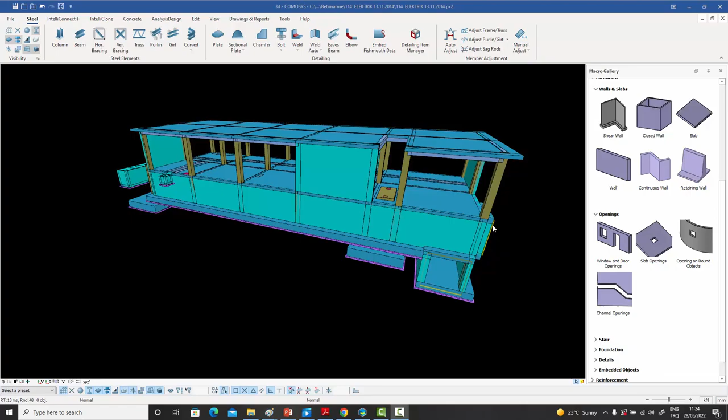Last week, we got an amazing response from everyone who attended the steel detailing webinar. I was hesitant to create a webinar lasting almost 2 hours, but to my pleasant surprise, some of you actually watched even that long video more than once to understand it better. Now, that shows that our audience is receptive and they like what they're seeing in Comosys. What it also shows is they want change.

So, emboldened by that wonderful experience, I decided not to hold back and try to show you as much as I can today as well. So, today I'll be talking about concrete modeling. Today I'll be talking about rebar modeling. And today I will also be talking about concrete and rebar drawings extracted from the 3D model.

Now, I know from our research that the concrete and rebar industry hasn't really embraced 3D modeling the way the steel industry has. And there are many reasons for this. Some are technical challenges, while others are merely psychological barriers which get in the way of decision makers. I will try to present Comosys to you in such a way which relieves both your technical as well as psychological fears. I will try my best to make modeling look like a walk in the park.

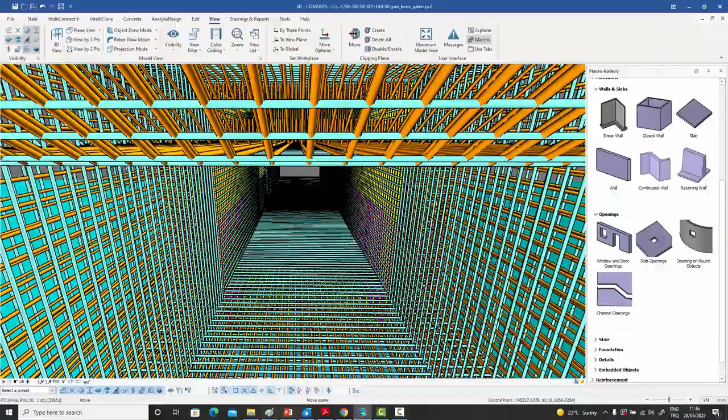I'm hoping to win over many new converts today. I'm hoping you will leave this webinar having decided to give 3D concrete and 3D rebar a chance. I'm hoping that concrete lovers will not stay behind and give their steel brethren a run for their money. But most importantly, I want you and your business to benefit from 3D modeling.

If you can reduce your man hours by just 20%, you can perhaps double your profits. But I'm here to tell you that with the right skill sets, you can reduce your man hours by half, if not more, if you use 3D modeling for both concrete as well as rebars. And that's not all. The quality of your work will also skyrocket. That's what 3D modeling is supposed to do when done properly. So let's start today's presentation.

Now let's create some simple beams and columns. And this is not really the area in which one program would typically excel over another. We can just copy a column around, for example. We can enter some beams, use the same copy array command to copy it across the columns. Obviously got one more copy. If you use the same numbers, I can delete the last part.

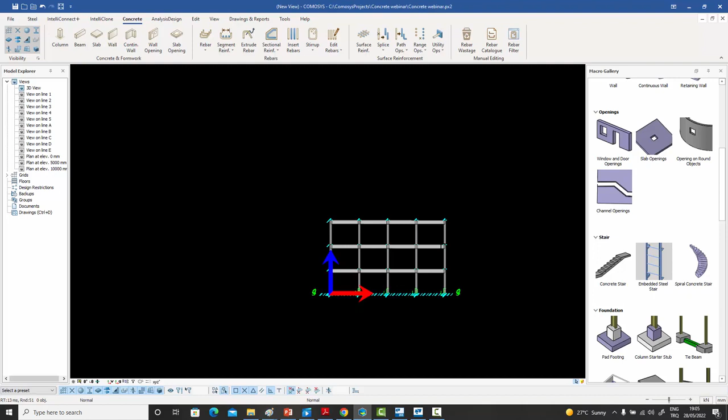This is extra, and I can then zoom in and enter the beam on the other side. Use the same copy array method to copy the beams as well. Then I can delete this extra one, and then I can look at it from the side. For example, I can maybe delete a part of the building like that.

Maybe if I want, I can select the joints only, and after doing that, I can just call the move command and move them up a bit. Secondly, I can maybe delete this part of the building, make some movement, make it look a bit different from a standard copy. So this part up till now, what you've seen is pretty much this kind of data entry for normal buildings, for high-rise buildings, for any kind of building.

That's very simple. It's when you get to the more complicated stuff that modeling starts consuming time. If it's only beams and columns and you're copying them around even 100 stories, that's not really much of an achievement. But when you really get to industrial type buildings with lots of holes and channels and whatnot, and I'll talk about those in a second, that's when you get problems, and that's where one program will be different from the other. Now let's create a slab.

So all we do is just select any number of points, at least 3. You can't enter less than 3. But if I'm going to select 4 points, a slab will be created immediately at the floor level on which I'm working. Now, one requirement, especially in industrial type buildings, is to have slab openings. So all we do is just go to the slab opening command, select our slab and select a point, and immediately an opening is created at that point.

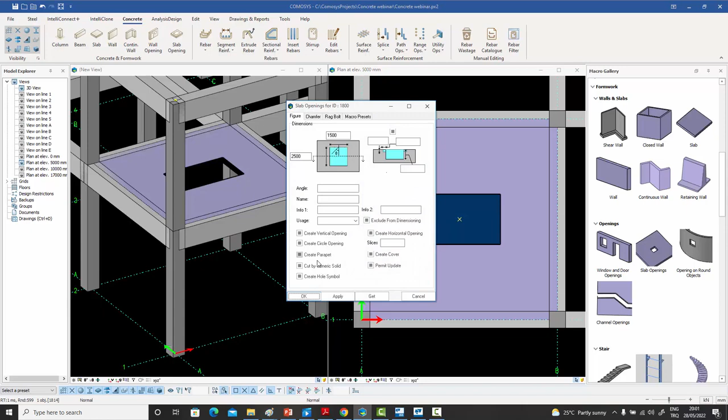Another thing I can do is I can double click it again and I can give it an angle. So if I enter 30 degrees over here, you will see that the cut which was created is then turned at an angle of 30 degrees. Another thing which we can do is convert this into a circular opening, for instance. So if I press this one, it converts it into a circular opening. I can bring it back by removing this flag, and that's as simple as that.

Another very nice feature which I have is I can double click on this opening and I can say create a parapet around it. And when I do that, this little parapet is created around that opening as a separate intelligent object, by the way. So if I double click on that parapet now, I can give it the dimensions which I want. So I can make this 500, make this 300. That'll change the dimensions of the parapet, as you can see on the screen.

Or I can go inside again, and I can even give a thickness, a width over here. And what it does is it creates a little place over here for some covers to come, which are very typical in industrial type structures. You can have a cover over here, and that cover will need to sit on that concrete. So imagine normally if you were doing this with manual detailing with lots of cuts, you would have spent probably about 10-15 minutes just getting this parapet in order.

But that's not all. If I continue double clicking on the parapet, I can even ask it to create a cover for me. And there you go. My concrete covers for my industrial structure are there. And I can modify these, and these are customizable. All sorts of customizations are available.

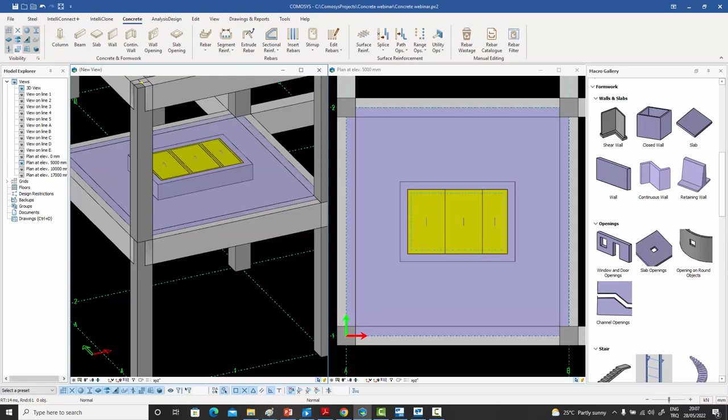But the point I'm trying to make over here is that the simple command of creating a hole in the slab, which we started off with, has led into so many details that that little hole converted into a circular hole or any other sized hole, or you could make a parapet around it. You could give it certain dimensions. You can create a cover around it. So within a few clicks, and all these are actually hindrances in other commercially available modeling software, because just finalizing this little hole will take half an hour, and typically detailers will shy from that. But in Comosys, you're free to do this kind of detailing very, very quickly.

Now, instead of creating the parapet, which we just did, we can just directly create this little depression directly on that hole as well. So if I were to enter that, we can see that instead of the parapet, directly I've created this depression so that a cover can come directly on top of this hole.

And this simple hole command doesn't even end there. I can even give chamfers. So if I give 4 chamfers to the corner points, I can create this sort of a chamfer around it if I wanted to. Or I could give it a different type of a chamfer if I wanted. I could remove this one, and I could give point number 1 a circular chamfer, and a totally different kind of an opening would be created.

And it's not even that only. I could just double click on this, create a small hole, for example, go to my chamfer tab, and I can have a grid of holes if I wanted to. I can have them in both directions. So by the simple cut command, I've created several holes in that slab in one go by just modifying the parameters of a single command, which we used for creating slab openings.

So you can see that this kind of versatility is extremely useful when you're dealing with complicated situations, industrial plants, and your normal modeling techniques, while available, do take up a lot of time. But with Comosys, you can do the same stuff very, very quickly.

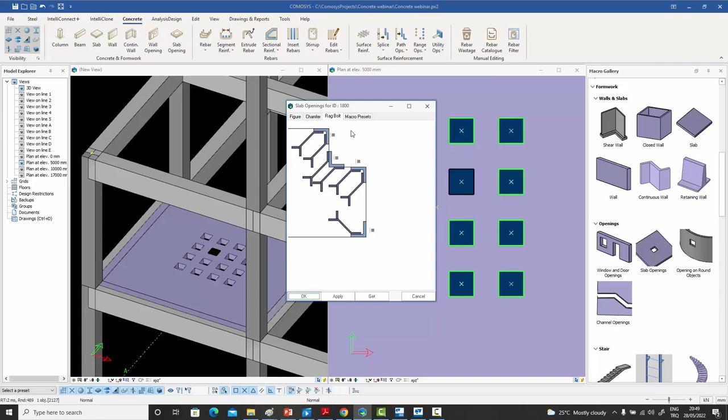So the idea behind 3D modeling is that you should model everything in the 3D model, not just half the building or part of the building. Because the moment you start modeling a part of the building, it comes back to haunt you, and eventually your model will be broken from your drawings, and that'll be the end of it. But with Comosys, you don't need to do that. You can actually model right down to the final rag bolt and get on.

Now let's enter a few walls. So I go to my wall button and I select 2 points basically. And the moment I do that, you can see on the 3D view that the wall has been created. Let's continue on the other side and create the wall over there as well. Now, as you can see over there, the height of the story is different. The height of the building is not the same as this side. So I just double click it and I change the top level to 5,000, and my wall has been finalized.

Now, if I open up the dialog box again, you can see that we have complete control over the top level of the wall, over the bottom level of the wall. So if I specify this to be, say, minus 2000, then the wall will continue 2 meters down as well. So I have complete control over that. I have complete control over the thickness of the wall. I can give the height directly or by giving the elevation. I can give it some start and end offsets if I wanted to.

And there are some, once again, details for the top of the wall. Once again, all these are features which save time. So if there's something sitting on top of the wall, you can create this kind of a feature at the top by directly entering some numbers instead of going through the normal procedure of using the cut command, etc. And it's very easy to use, as you can see on the screen. Just enter 2 points and your wall is ready.

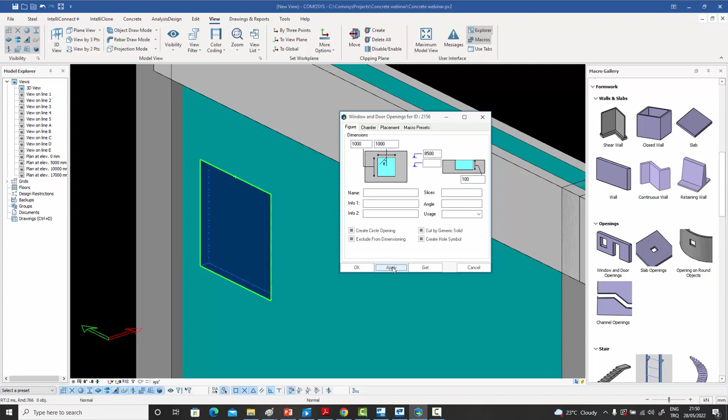For example, if I were to enter 100 over here, I can even create a partial opening. What that means is, if I turned off the cuts, for example, it can just create a depression in the wall, not a hole right through the wall, but just a depression. So there's a lot these commands do. They look like simple commands to create openings in slabs and walls, but they can be used to create openings of all sorts and with different details.

In concrete modeling, we usually have continuous walls. So these are not walls which you can create with 2 points, but you need multiple points to define them. And we can do that very easily with the folded plate command in Comosys as well. So let me just go through a few points. Let's go like that and right click, and immediately a wall is created by the default settings.

Now, this is a bit more than just a normal classical folded plate, which you might be used to. What you can do is you can double click on the wall, and you can go to the chamfer section. And this was point number 1, 2, 3. So you can go to point number 2 and give it, say, a chamfer of 2000. And when you do that, you get that chamfer. I can continue. I can give the point number 3 a chamfer of 2000 as well.

I can continue, and what I can do is I can ask for the outer chamfer not to be created. So when I do that, you can see on the screen that the inner chamfer has been created, but the outer chamfer has been omitted. So you can have these architectural requirements, and by the same folded plate command, which normally doesn't do these kinds of things, you can create walls of this kind of variety.

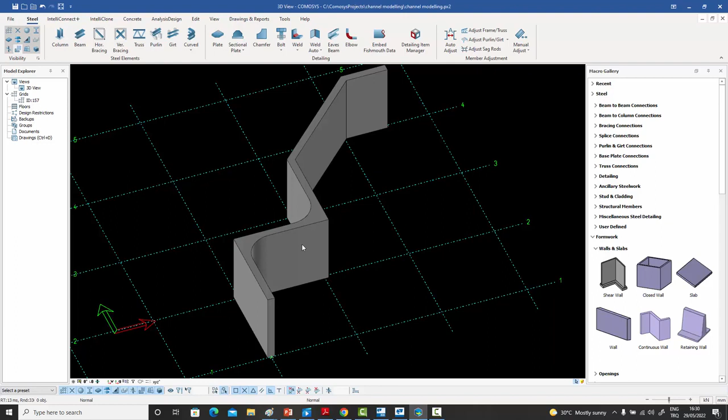Another thing which is very useful is that normally in a folded plate command, the thickness is constant across the wall. But I can ask it to do a thickness of 500 millimeters for the first leg, 1000 millimeters for the second leg, and back to 500 for the remaining legs. And when I do that, you can see that it starts off with a thickness of 500, turns into a thickness of 1000 millimeters, back to 500 for the rest of the remaining legs.

And I can just go back in and even say do that only for the third leg, and from then on just make it a really thick wall of 1.5 meters. And immediately on the screen you see that you've got this variable thickness wall created by the same folded plate command, which can also be used for steel structures. But over here with concrete structures, these kinds of walls are not very uncommon. You can find them, and whenever you do, it's very easy for you to model them in Comosys.

Now, just like we saw how easy it is to create holes and then modify those holes or multiply them in the form of a grid, similarly, in industrial buildings, pits are also very common, which is when in a slab you have an opening which then converts into a little pit, and there's a bottom slab which is lower than that slab, and there are 4 walls around it, and that takes up a lot of modeling time for most people. So in Comosys, we've provided a direct command for that. All you need to do is select the slab and select the point, and immediately a pit is created, as you can see on the screen.

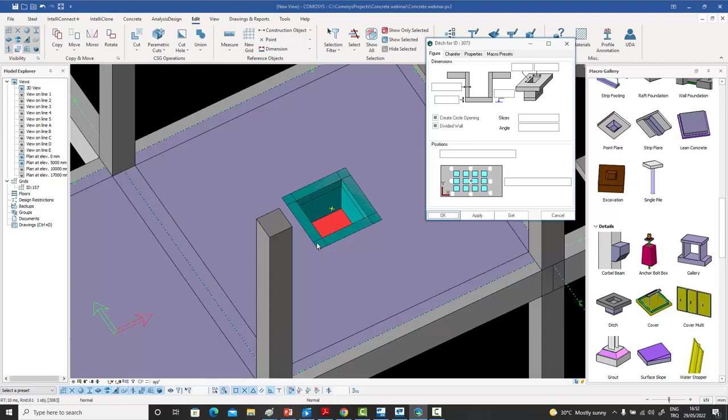Normally, typically a detailer would first create a hole, then create the 4 walls, then create the bottom slab. And if there's a revision regarding the heights or anything, then everything would need to be changed. But in Comosys, it's very easy to just do that. And once again, you have your chamfer parameters and your other geometrical parameters to play with. You can even create a circular opening if you wanted to, and you can create the walls as divided walls or as one single wall. That would depend on how you want to number them.

Now let's quickly select the bottom floor columns, press enter, select our profiles through on the fly filtering, double click, and once we get the columns, we can move the bottom to 2 meters below the 0 level, and the top can remain the same for the ground floors, and all the columns by this single motion will be moved 2 meters down. We can once again move the walls as well. We can give these a level of minus 2000 as well. Same for the other side.

And once we are done with that, we can go to our simple pad footing command and select the column, and the pad footing is created. We can select the pad footing, copy array, and in the same way we did with the columns, you can just copy the pad footings. And in a few clicks, we've gotten the foundation system almost ready as well.

Now, with a few clicks, we can create our tie beams between these pad footings, for example, like that, just by selecting the two pad footings, and then copy that with the array command as well. And if you just press copy, they will be copied in that direction. And then we can continue for the other direction as well.

We can create a tie beam between these two, select it, and do the array copy. But this time we do 4 copies in the X direction and 3 copies in the Y direction. And we just say copy. And with a few clicks, we've gotten the tie beam system ready as well.

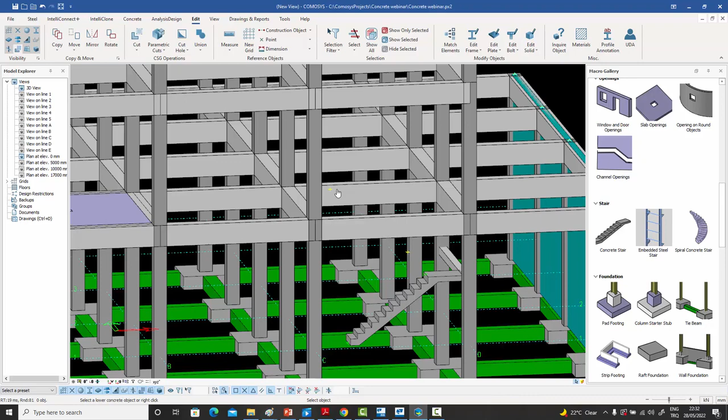Now, as you can probably tell by now, modeling in Comosys is quite easy, and I'm going to continue doing that. For example, let's model a few stairs. I'm going to select a few points, right click, and once again, select a few points and right click. And as you can see, it's not that difficult. If I just double click and do some modifications, you can see I'm doing it as you're seeing it on the screen.

With a few clicks, you can create the staircases as well, and then you can copy them to the other floor. For example, let's now copy them 5 meters above, and we get the second floor as well. So with a few clicks, like you saw on the screen, you are able to create your staircases and then connect them to the beams and the columns. And as you're doing it, the model is being created.

And what I mean by that is that if you notice right now, all these are separate pieces. They're not monolithic. But what Comosys does automatically is it converts them into a monolithic piece of reinforced concrete. So it becomes one piece when it comes to the drawings.

And if you notice right now, I haven't given any detail to the clashes. Everything is clashing with everything. This beam is going inside the column. This staircase landing is going inside the beam. The slab is going inside the beams. The walls are going through the beams and whatever. So there's a lot of clashes going on right now. But all those clashes will be sorted out once we go to the drawings.

So if I was to go to the drawing side right now, and open a drawing, basically I had created some views, but the views were empty because I didn't have any model. But now the views have been filled up because I was doing the modeling in front of you. So as you can see, everything has become monolithic and has become one piece on the drawing side. And we'll talk a lot about this later on. But I just wanted to show you that as we are doing the modeling, everything is being connected, and it's becoming one monolithic piece in concrete.

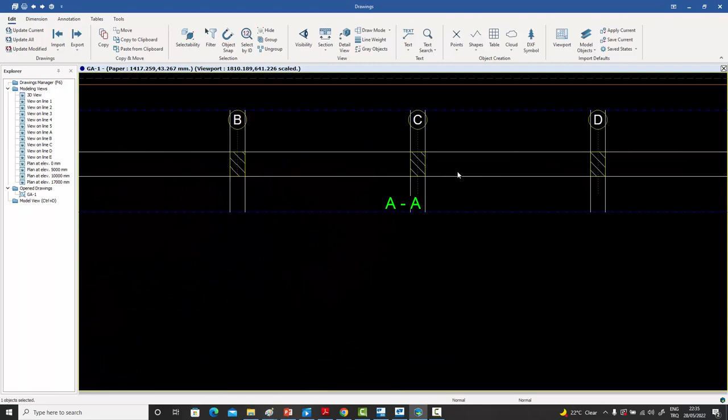So this is a section taken there. You can see the stairs. I have the section over here. If I move the section from here to some other location, immediately that section over there will be modified according to the new location. And basically the point being that the drawings are completely connected with the model.

They have not been dimensioned yet. They haven't been annotated yet. We'll talk about that. But at this point, what I want you to notice is that it has become one monolithic piece, what was many small pieces or many individual pieces on the model side.

Now, I've been emphasizing throughout the webinar that if you want to do 3D modeling, you have to do it completely. You can't do it partially. And everything needs to be modeled. And once again, in concrete also, the steel industry is fairly used to this, but the concrete industry, unfortunately, is not. And what they do is they typically try to model as much as they can, and then they switch programs and they move on to AutoCAD and finish the job in AutoCAD.

But this is not the right way to do it, and Comosys will encourage you not to do that. So, for example, one thing which you might notice is incomplete right now is the lean concrete under the foundations, which needs to be poured. And you might be thinking, oh, that's going to take a lot of time. There's so many foundations and tie beams, all of which will need lean concrete under them. But I'll just show you how quickly it can be done.

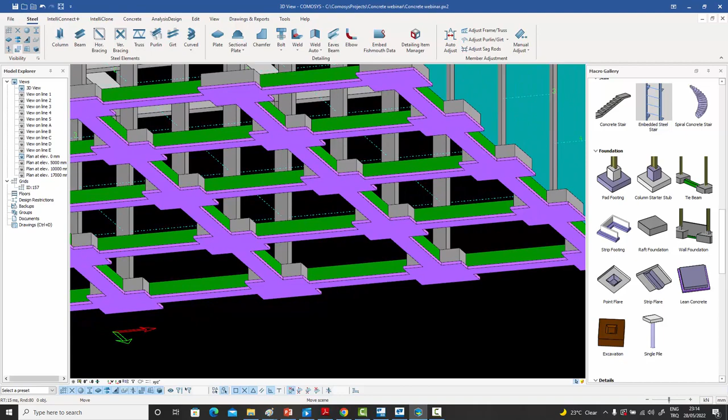You just select this bottom area, press enter, press the plates, and you can group them in different ways. I have selected the tie beams and the single footings like that. And after having done that, let's just go to this lean concrete command over here and just press it. And the moment you do that, just look what happened. These pink lean concretes have been modeled under the foundations with a single click. This would have taken you hours and hours to do maybe. But with a single click,

all the lean concrete has been modeled, and now that it's been modeled, it's going to show up in the drawings as well. And this is not going to be unioned with the main cast in place concrete. This is going to be a separate union. It's going to turn up as a separate object, and there'll be a line over here. Normally, if it was all going to be union, they would merge into one piece. But in this case, the program intelligently knows that the lean concrete is a separate object, and we'll see the results of that later anyways. But what I wanted to show you is how quickly and how efficiently Comosys will help you literally in a few seconds model your lean concrete.

Now let's talk about drains and channels, which are very common in concrete industrial buildings, and they're used for different purposes. There would be a drain going along a slab, for example, collecting some fluids or draining them out. And they're usually very difficult to model with cuts because of their shapes. So in Comosys, what we have are specialized cut commands. So let me just select the slab and right click, and then let me just show it a path. It's going to select a few points. Point number 1, 2, 3. Let's go like that. Let's go to the mid. Let's come back over here, and let's go out from there, and then right click.

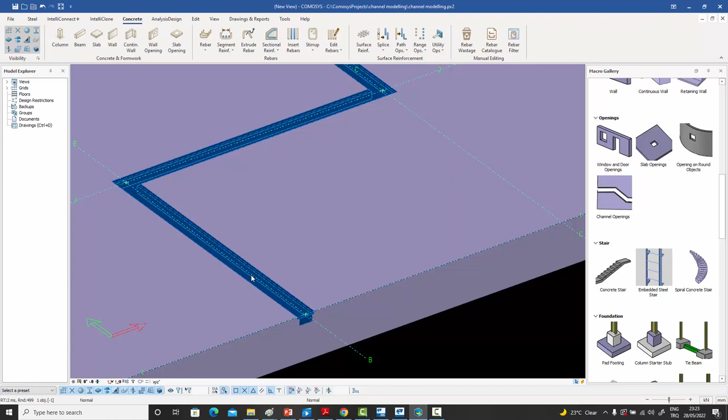Now, the moment I do that, let me just close the cut so that you can see it better. And you can see that this channel has been created all along that path which I showed with a few clicks just by selecting the points. Normally, if you were to do this by using the normal cut commands present in typical commercially available softwares, this would be pretty time consuming. And this is not all. If I were to just open up the cut and double click on that, you would see that there's a lot more going on over here.

For instance, I've got control over the widths of these channels. So I can enter 500, for example, and if I press apply, the width of the channel changes. But I can also enter 500, then 1000, and then go back to 500. In that case, the second leg of the channel has a width of 1 meter, and then the rest go back to 500. So this gives me even more control over what I can do with the command.

Another thing which I can do is I can turn on these little boxes over here. And when I do that, the ends have been modified, if you can see. This kind of a detail is pretty common wherever it's pouring into; the final detail could be something like that. So imagine doing that by using the classical cut commands. That would take you a long time. But the presence of such dedicated cut commands will really make your job a lot easier.

Another thing which I can do is I can give chamfers. So this was point number 1, this was point number 2. So I can go to my point number 2 and give it a chamfer of, say, 1000 by 1000. And if I do that, you see that this chamfer is created over and above my original definition.

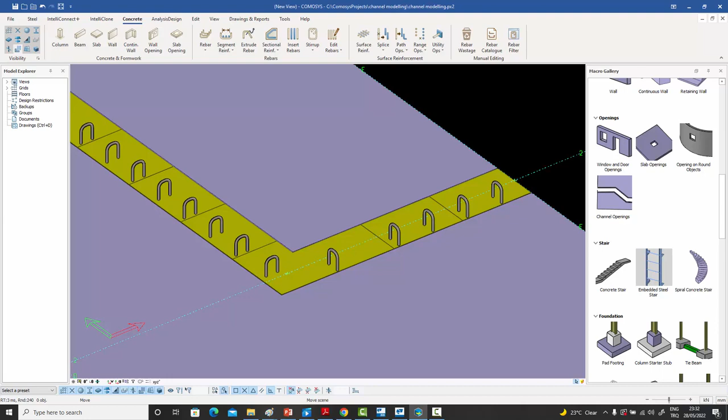But the point being that with a single command, just by selecting point 1, point 2, point 3, 4, 5, 6, 7, you have created a very complex detail which then allows you to go directly to the drawing side and create the drawings automatically from this model, instead of taking it to AutoCAD and finishing it off in AutoCAD for details such as these.

Galleries are very common in industrial plants, and these could be underground galleries or overground galleries, depending on the situation. And they're typically used to carry pipes or electrical cables from one point to the other across the plant. And this is what they typically would look like. So let me set the origin of interest somewhere over here, and so it's basically a gallery. And what you have is these cable raceways or pipe supports coming from the sides of the walls on which the pipes or the cables actually eventually run.

Now, creating this, of course, is slightly time consuming depending on the geometry. But in Comosys, let me just delete this one which you see on the screen, and I'll show you this dedicated command for galleries. All you need to do is just select point 1, point 2, point 3, point 4, and right click, and your gallery is created. If you double click on the gallery, you have complete control.

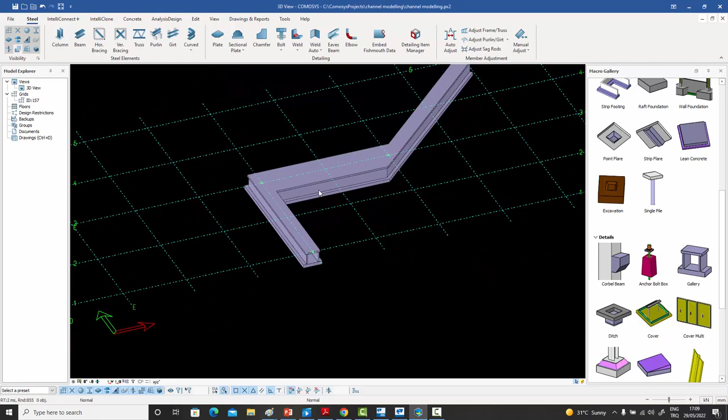You can obviously change the points around which it's anchored from those parameters. Using those parameters, you have complete geometric control, as you see, over the size of the gallery, etc. You even have options for widening the gallery at the start and at the end. It's very easy to see that doing this manually with 5 or 6 wall commands will be time consuming.

So for example, if I were to go to the properties section and go to the chamfer part over here, I can give my point number 2 a chamfer of 5,000, 5,000, and you can give this inside part a chamfer. Sometimes you have this issue where the pipes or the cables cannot turn that easily through sharp corners. So you need to give them some sort of a chamfer for them to turn. So it's very easy to just create this.

And the reason why I'm showing all this to you is to remove the fear which most people have of industrial plant concrete modeling. They think it's going to take a lot of time, but from what you're seeing on the screen, it's pretty obvious that with Comosys, you can very quickly go through the modeling of the concrete.

Another example which emphasizes the fact that we should model everything and not leave anything out of the 3D model is the excavation. Normally, when people do 3D modeling, what they tend to do is model the main structure.

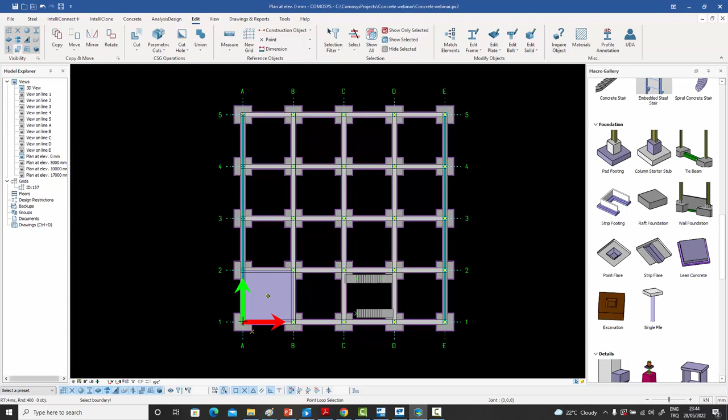So let's go to the excavation macro. It asks for the bottom level. So let me just say DZ minus 2,600. If you remember, the bottom level of the foundation was 2,500, but then we added the lean concrete, so that's the bottom level now. And then it basically asks me to go around the perimeter of the structure. So I'll just go around these main points and finish it off. And when I do that, it creates this excavation model.

Let me just double click on that and let's increase the size a bit, or maybe it needs to be a bit more than that. Yeah, this is better. And let me just rotate this and show you what it's done. It's created this hypothetical model of the excavation, and you can further model this in much more detail. I'm just going to show you what the results would be. Let me go to the drawings, for example.

As you can see in the drawings, that excavation now exists as part of the model. And now we can give levels over here. This is plus minus 0 level. This is minus 2600 and so on. But the point is that because we've modeled it now, we don't need to go to any other software and finish it off over there. We can continue working in Comosys, and that is the basic rule of 3D modeling, that we should not leave anything out. And once again, what I just showed you was probably the simplest model that could have been made.

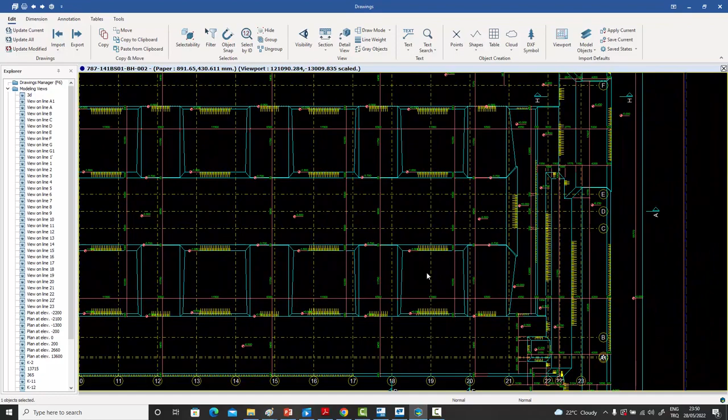Here is a much more complicated model of excavation, and you can see that this is multi-level excavation from here to here, then further down, and the slopes have been given. It has all been modeled, and a separate drawing has been created just to show the way the excavation is going to be done at the site. And this feature becomes extremely useful because not only can you show the details of the concrete, but you can also show the details of the excavation for the people at the site, and you can provide 3D views of the excavation as well, which also makes their job a lot easier.

Now, of course, in real life, concrete can be a lot more complex than merely beams and columns and walls and slabs, and you can get very complicated shapes, and that's the beauty of concrete as well. But your modeling programs need to be able to handle those shapes as well. So we have in Comosys all these generic primitives, like boxes, cylinders, cones, pyramids, spheres or toruses. So let me talk about the tapered solid, which is interesting. So let me just go over.

All you need to do is basically just select a closed loop, and it'll create a tapered solid for you. And then if you double click on that, you can give it a height, and let's give it a height of 5 meters. And once you enter it, the box is created. But then you can go on and give it a taper of say 11 degrees. And from all sides, it's going to be tapered inwards to 11 degrees. You can give it minus 11 as well, or whatever number. But what you can do more than that is actually say, okay, the first line would be 11 degrees, but after that, I want 20 degrees. So you can get an even more complicated tapered solid if you want. This really makes it quite convenient.

But more than that, we have other very interesting features as well. Let me delete this one. And let's go to the extrusion feature. So you can have, for example, retaining walls with this kind of a cross section, or anything else as well. And you can create these by using this polygon command, and you could even put holes inside them if you want.

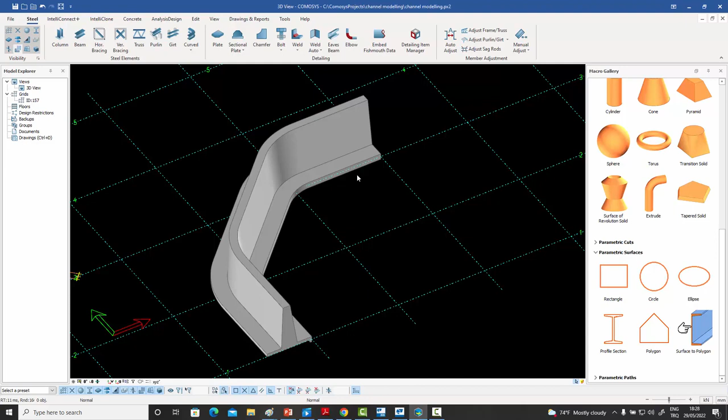And this kind of capability can then be used to model these complex shapes in concrete. And then you can go to the 2D drawings, and it will be unioned with all the other beams and columns or whatever you have in your structure, and it will become one monolithic element.

Like I said, they can clash as well. That's going to be okay. The unioning feature in Comosys doesn't really care about that. It manages to create a monolithic solid on the drawing side. Beyond your extrusion, which is very powerful, like I said, you can even have holes in your cross section and extrude them. But beyond that, you have surfaces of revolution.

So, for example, I have this cross section over here, and I want to revolve it around itself 360 degrees. I just go to the surface of revolution command, select that, and select an axis of revolution. And the moment I do that, a surface of revolution is created. So these are very powerful features.

Like I said, you have the primitives, you have the tapered solids, but you also have these extrusions and surfaces of revolution. And basically, with these, the sky is the limit, and you can model practically anything under the sun which your complex project might require. And you can be assured that the drawings will come out very neat and clean according to that.

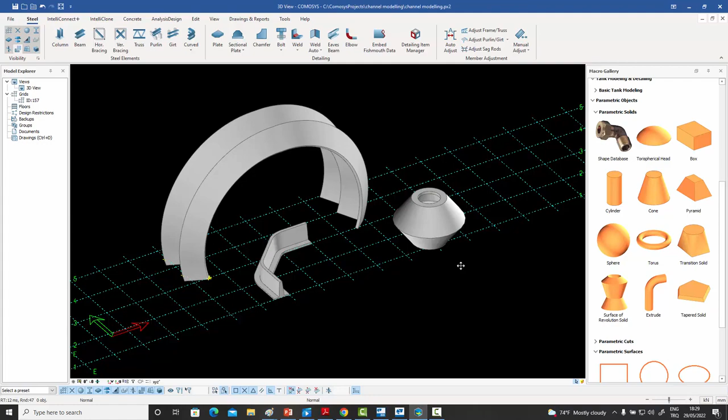Now let's talk about embedded steel. And the modeling of embedded steel is actually quite important. Sometimes companies don't do that and they prefer to do it in AutoCAD, and that's because they don't have the nice and good tools to do the modeling quickly. But it's very important to have it modeled, because once you have it in there, then you can see any clashes with the rebars and stuff like that, and also the general quality and all your bill of quantities will be much more accurate.

And don't take it lightly, because embedded steel is not like 5 or 10 or 15 pieces. You can have projects with hundreds or thousands of embedded steel placed in your concrete. We just did a project on Comosys recently in which the number of embedded steel plates was over 100,000. So you can well imagine what kind of pressure that would put on somebody who's doing that kind of stuff with AutoCAD. So how do we actually model embedded steel in Comosys?

Well, it's very simple. All you do is set your work plane to the surface on which your embedded steel will eventually be located. And then if you've got the location of the embedded steel on that surface, or any snappable point, just go to your embedded steel command, select the origin, and select an X direction. You could have an inclined direction as well. You can select any direction for the X axis. And the moment you do that, you can right click, and your embedded steel will be created immediately at that point.

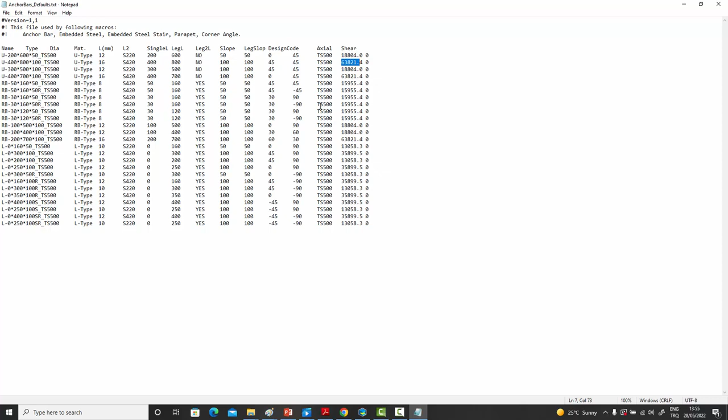And over here, you can see that you can set up your company standards for the different types of bars at the back. And for each one, you can even have axial capacities of how much tensile forces they can resist. And then that'll be a quick reminder for you when you're designing the embedded steel. So it's very general the way it has been set up.

Like I said, you can have all sorts of combinations of your bars, and even after you pull them from your company database, you can still go ahead and modify them for a particular project. So this one has a length of 600 millimeters, but I don't want it that long, so I can modify it there on the fly, and I can create a custom one there and then. And like I said, you can always in Comosys save them away as your company presets.

So if I wanted 16 anchor bolts instead, I would just load that, and my anchor bolts will be prepared. If I wanted 4 anchor bolts, I can give them different names and save them away for later use. If I wanted 4 rag bolts, for example, I could just call in the rag bolt option. If I wanted, say, 4 tension bars along with 2 shear keys, I could have that as my embedded steel. So these options are very powerful. You can save hundreds of different types away, or however many you use in your company.

And once you have them saved away, which is very easy, not time consuming at all, you can very quickly go through. All you need to do is just select points, like I just showed you. You put your work plane on the wall, or on the slab, or on the inclined wall, or wherever it is that you're working, and you just basically point and shoot, and it's as simple as that.

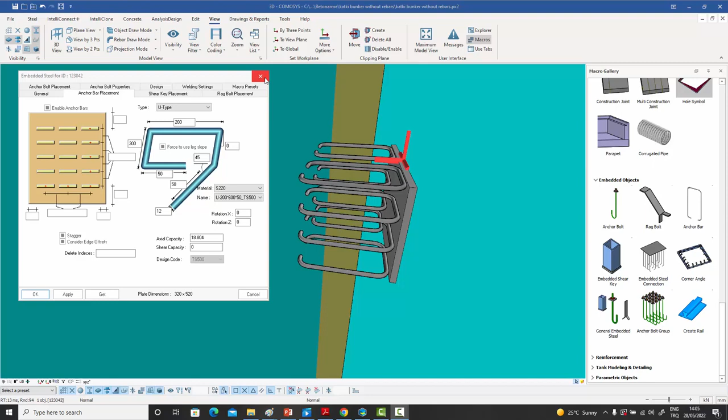One thing worth noting is that while we don't have a lot of control over the objects created by the embedded steel, we have complete control over the way the grid will be set out and the distances between these bars and all that. But whatever bar you choose, so for example, if we have 8, 10 bars over here, they'll all be the same from within the macro. But from outside the macro, you actually have individual control on every one of those bars.

So I can just double click on any particular bar, and I say this particular one I want to be of a length of 100. And that particular one will be shorter. And maybe I can do the same to this one as well, or the top two. So I can modify exactly according to what my requirements are, even if the macro doesn't really allow that, because I have individual control over the embedded elements once the macro has been done with them.

And of course, like with everything in Comosys, if you were really pushed, you can do manual detailing and you can create any kind of an embedded steel which you wanted. This is a very simple one. I remember doing an embedded steel which looked like half a building because it was carrying almost 3,000 tons of tension. It was a huge bridge related project. But what I meant to say is that you can basically model anything you want inside Comosys.

Now, there's a lot I haven't shown you yet, but we don't have time, so I'll have to just move on. So, for example, I haven't talked about how to create grout or how to create surface slopes if the surface has a slope, for example, how to create water stoppers, how to create individual covers if you needed to, how to create those hundreds of anchor bolt cutouts, which we saw in some of the models, maybe how to create flares.

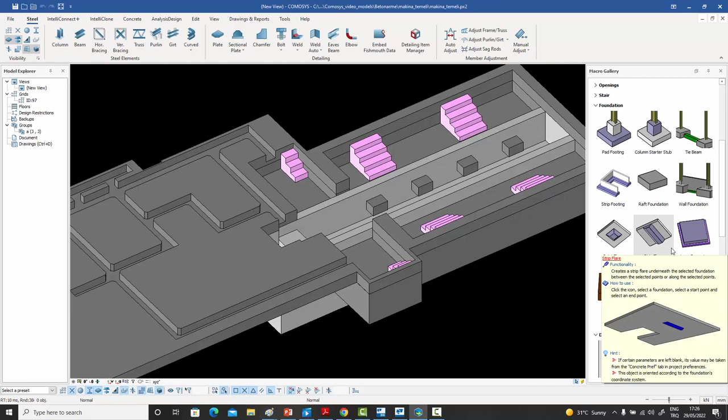And once you start doing that, like I've mentioned earlier as well, you basically lose the game. It's not the way you're supposed to do 3D modeling. So the reason why I'm going through these things one by one is to show you how and why Comosys will allow you to actually finish the model even when you have complicated industrial plants which need to be modeled. Now I want to say a few words about general arrangement drawings in Comosys and what kind of things are involved in creating general arrangement drawings.

So you saw me create most of this building. I've just copied these floor slabs everywhere. That hardly took a few minutes on all the floors, and I've also created some anchor bolt cutouts on the first floor just to give it some sort of a variation for the drawings. And now I'm going to go to the drawing side. So I double click on that, go to my drawing manager and open up my general arrangement drawing, in which I have imported some of the views, not all.

I've imported the 3D view. I've imported the ground level, zero level view over there. I've imported the 5,000 millimeter floor level where I have those cutouts, as you can see, the anchor bolt cutouts, and these pits in every slab. And there's a section as well over there.

Now, importing these views into the drawing hardly takes a few minutes, not even that. All you do is you see the list on the left hand side of all your model views, and you can just right click and say create viewport, and the view will be created. So that's hardly time consuming. What can take some time is the annotation of these elements and the dimensioning of these elements. And I want to take you through the steps of doing this because it's not that difficult at all. And if needed, you can always make some manual modifications.

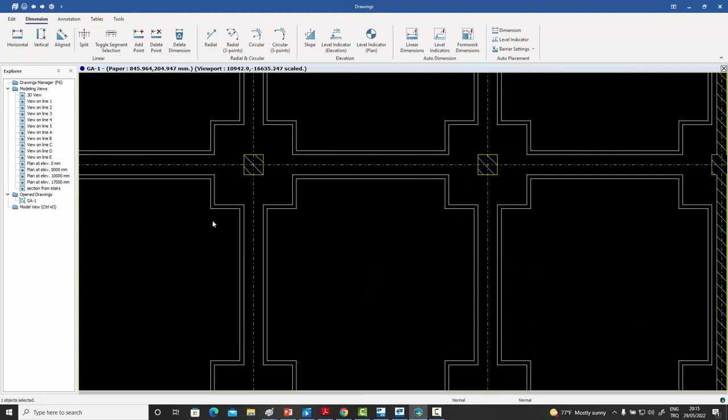So let's go through the dimensioning step first. What you do is you select any viewport and you go to this command, which is the linear dimensioning command for a particular viewport, and you just press it. And the moment you do it, the dimensions for the formwork, for the concrete of that viewport are created for you, and they're not even repeated. For example, this one is the same as this one, is the same as this one, so it doesn't repeat them again and again in the inside. Had this particular one been a bigger foundation, it would have gotten a separate dimension.

Now you can do the same on this viewport. Just go there and press the command again. You can go to this section over here and press the command again, and your dimensions will be created. Now what you can also do is select individual elements like these anchor bolt cutouts and press the same command again, and they will be dimensioned there and then in front of you.

Another thing which you can do is press the level indicator symbol over here. So just select the viewport and press level indicator, and your level indicators will be created wherever the level is changing. Wherever you have a new level, you will get your level indicators, and then you can move them around if you wish to. For example, if you do that in the plan view, you will get level indicators like this in the plan view, and you can put them any way you want. If there are different levels, then all of them will be dimensioned.

So the dimensioning, as you can see, is pretty fast, and you can always go and manually modify it if you want, but it's pretty clean as well. The next thing which you want on these drawings is the annotation. So you want to see the assembly mark of each beam and column and slab and so on in the sections and in the plan views, etc. And once again, you can do that individually.

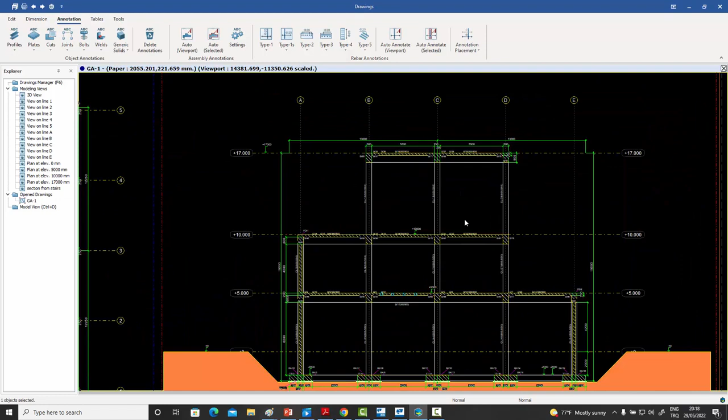Obviously, this will depend on my numbering options and my selection as well, and my settings. Right now, I haven't really checked the settings, but what I'm trying to show you basically is that you just select the viewport and you select auto annotate, and you select the viewport and you select auto dimension, and you get reasonable results because these are general arrangement drawings. They're not assembly drawings, but you get a lot of the dimensions which you will need, and then you can finalize them after if you see something missing, or if you see something needs to be done in a different way.

Now, you might be thinking that I've showed you a fairly simple building and gone through the commands, but I've promised you that any kind of an industrial structure can be done. So here is a little example of not that complicated, but reasonably complicated structure, where this is a water intake structure, which has been modeled entirely with the commands that I've showed you. As you can see, all the holes in the slabs and the depressions and the anchor bolt cutouts and the covers. And over here, for example, we have a very unique feature in which this part of the concrete, let me just hide this. So you can see that this huge water intake pipe was there, and this pipe itself became the formwork for the concrete poured around it.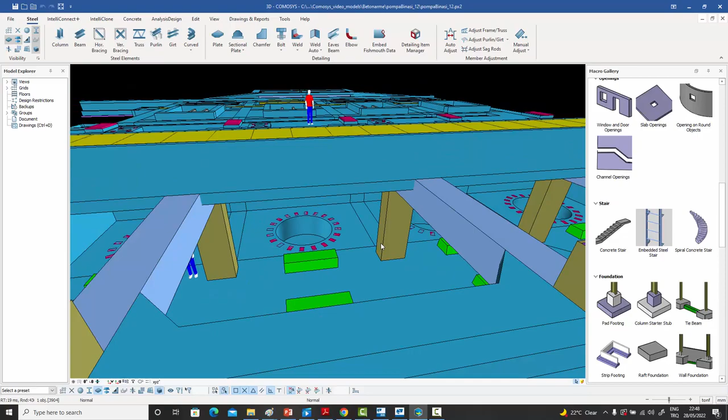And let me hide the so you can see on the screen that very complicated things can be done with Comosys very easily. What you see on the screen hardly took a few days to do as far as the concrete is concerned, and all the commands which I've just showed you went into the detailing of what you're seeing on the screen right now. And once you have the model ready, you can immediately go to the drawings and create your plans and your sections and 3D drawings and whatnot. And once you're done with that, then you can continue with the rebar detailing.

So here is another example of complicated structures. These are examples of the hundreds and thousands of embedded steel which I was talking about. This is a cement plant, and here we see a combination of steel and concrete together. So, I mean, it's pretty clear that Comosys is not limited to the classical just beams and columns type of structures that we typically show in the webinars, just because of time constraints. But anything of this sort, any complicated structure, can easily be modeled within Comosys.

Here we are inside the concrete, and as you can see, the rebars have been modeled in 3D, and there's a lot of rebar in there. This is a huge structure, but it's so easily being done, and you can see the beautiful results on the screen. And once you get used to this kind of modeling, and once you get used to 3D modeling of rebars and concrete, you will not look back. You will not want to go back to the classical 2D AutoCAD methods.

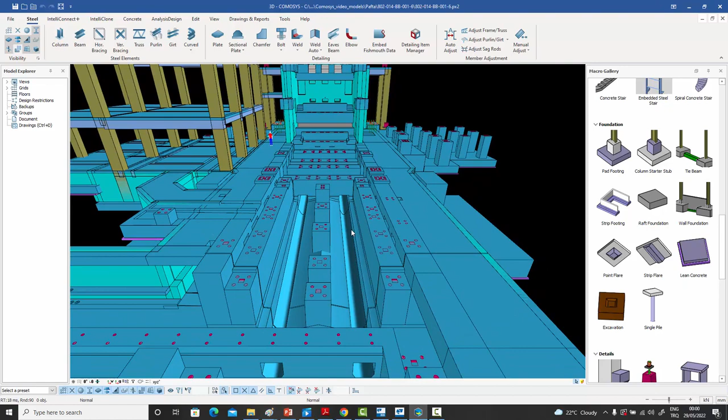How about this for complexity? This is the foundation of a continuous casting machine, which is used in steel plants. And this is a huge machine, and all these are points where the machine is sitting on the concrete, and it has to be modeled extremely carefully. As you can see, there are lots of these little stubs coming out, anchor bolt holes, other types of depressions, changes in geometry, all these drainage channels, and what you're seeing is one of the most complicated types of equipment foundations you will ever do.

And this was done entirely in Comosys and in record time, much faster than the AutoCAD statistics which we had from the past. And this is truly something to think about. If you can model something like this and put rebar in it and take plans and take sections and get your material lists and your material takeoffs, everything from this model, then there's practically nothing which you can't do.

This should suffice to basically convince anyone that whatever they're doing in concrete, however difficult of a structure they're doing in concrete, they should not worry and they should immediately switch to 3D modeling. And you might be thinking: show me the drawings which you have extracted from those complicated 3D models.

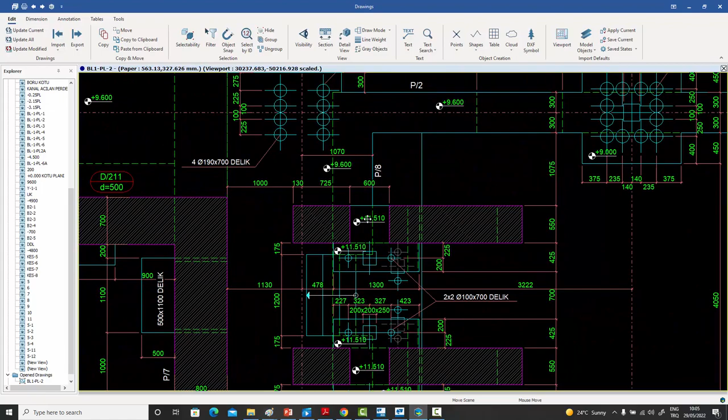So what you see on the screen is Comosys once again. These are drawings taken from those models, and you can see the quality of the drawings. They're very clean, and they can easily depict or show or put in the form of a 2D drawing any complicated structure which you can model inside Comosys.

Here is a sectional view from the same structure which we just saw. And as you can see, it's very clean. The section has been taken properly, and you can obviously modify the points from which you want to take the sections. And once you have the section, you can just go over it extremely quickly with some automatic dimensioning commands, which I will show as well.

Here is another section where you can see those inclined drains as well, extending in the Z direction. And here we see them with a lesser depth, so we can just see a part of it. As you can see, these are all automatic sections taken from the model, and they really bring down your work. Otherwise, for each section, if you're doing it in AutoCAD, you would have to work half a day to create these sections, and they would still not be accurate. But once you have the 3D model, then the generation of plans and sections is really very easy.

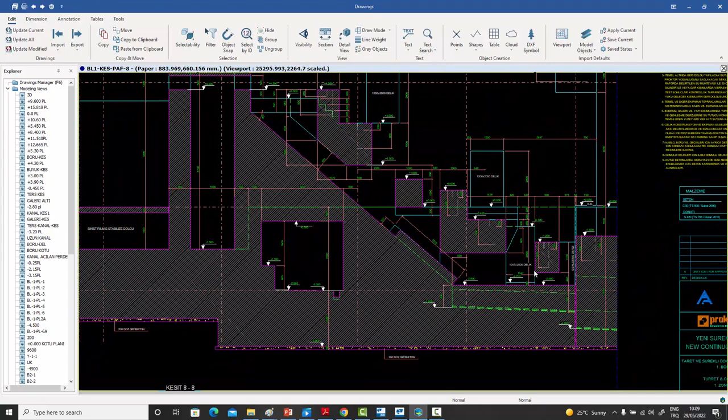Here we see another section from a different area in that CCM machine foundation. You can see the quality of the drawing. And this will give you an idea that what we are talking about is not just those simple buildings with beams and columns in which you can produce sections and plans very easily. These are really complicated structures, and they really bring down your man hours tremendously.

To make the people at the site understand the concrete better, you can even have 3D sections. You can create sectional views from the 3D model and show them to the people at the site, and they will understand exactly how they need to pour the concrete. Here you see another 3D section, and over here you see several sections taken in the same drawing.

Over here you see those hundreds of anchor bolt cutouts, which are very common in equipment foundations, and they've been dimensioned very cleanly, and you can see how a beautiful drawing like this can really improve your quality, your brand name, and also, along with the 3D images and the 3D sections which I just showed you, can really take the level of your company several notches above.

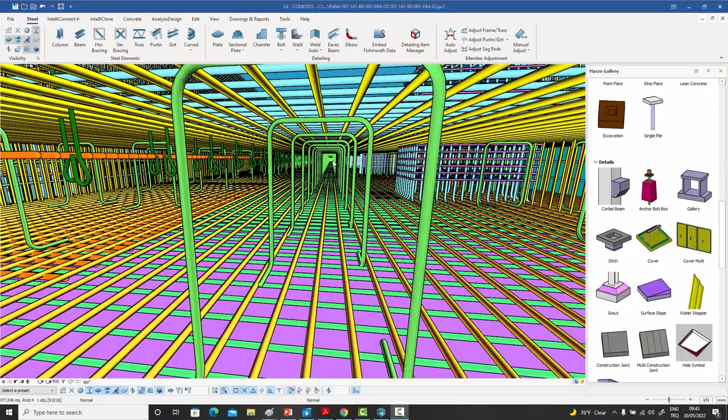There will be a few hiccups, there always are, but that's the job of visionaries. They are the ones who keep pushing despite all the naysayers and eventually take everyone with them to a higher level. Change will need to come from the top. Change will need to come from the visionaries.

Now let's start modeling rebar together. Watch me show you how easy it can be. I'm a firm believer that the best modelers are the ones who can work fast even without macros. Obviously not as fast as with macros, but fast enough to get the work done faster than the classical 2D AutoCAD techniques. So follow me and imagine you are doing it. When you start believing is when it will happen for you. It's a bit like the Matrix.

So let's start with the absolute basics. Here on the screen, you see a small slab. It's pretty simple. And we want to put some rebar in this slab. Now, over here in the concrete menu, we have this rebar command, one to create a rebar group and one to create a single rebar. Let's go with the rebar group.

And once we do that, it asks us to select a parent object, which is the slab. I select that, then it asks for the shape of the rebar. So I'm going to put a rebar like that. I'm going to say this point, basically I'm using the concrete itself as the snappable element, this point and this point over here. And then once I'm done with the shape of the rebar, I right click. So the rebar shape was like this, like this, like this.

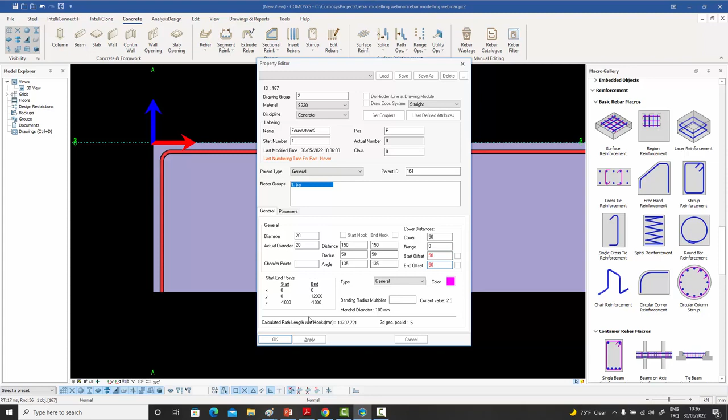But right now, the ends are still touching the bottom of the slab, and I don't want that. So for that, I just double click again and give it a start offset of 50 millimeters and an end offset of 50 millimeters again. And when I press OK, my start offset and my end offset have also been pulled back.

Looking at it from the plan view, I see that the range also needs to be pulled back. So I double click on the bar, and here I have my range pullback. So I give it the same 50 millimeters. And now my range is also pulled back with a clear cover of 50 millimeters on both sides.

By the way, you can enter more than one number in this range section. So I can give it a number of 100 millimeters for the start and 50 for the end. And in that case, my start will have a pullback of 100 millimeters, while the end will remain at 50.

The same kind of thing is possible for the clear cover as well. So if I were to open that and, instead of saying 50, said 50, 150, and then 50 again, what that would mean is that my first leg will be pulled back 50 millimeters, the second leg will be pulled back 150, and the third leg back to 50. I can do the same thing with a minus sign as well. If I put in minus 150 over there, my second leg will be pulled out of the concrete.

Now, when I select a rebar, this little gray button appears over here, and instead of double clicking on it and opening up the entire dialog box, which is complicated, I can select the rebar and just press on this gray button, and I get this little box which gives me the most frequently used options. So for example, I can open up the hooks at the start or the hooks at the end, turn them on and off. Obviously the parameters will depend on whatever has been set inside.

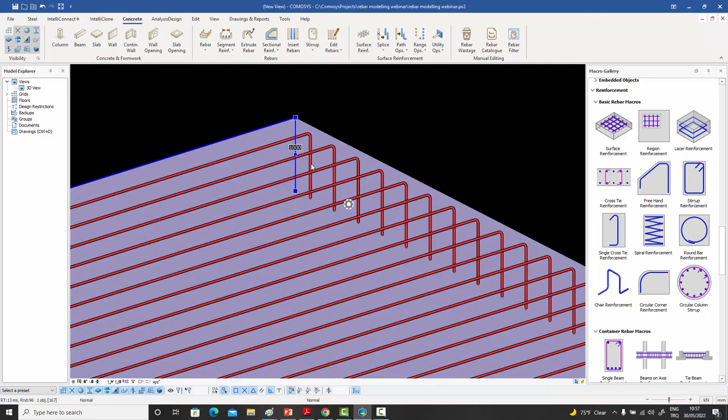I can do that with the segment at the other end as well. I can go and I can make it move inwards as well. It's a linear tapered bar now, but there's more. What I can do is I can select these, and at the end path, instead of selecting the whole segment, I can select this bottom point only, or I can select it like that. I'm sorry. Yes, like that. And I can actually make it go up if I wanted to, say 50 millimeters.

And when I do that, what's happening is that the end bar is moving, but the first bar is still there, and there's linear interpolation between the 2 points. I can do the same at the other side as well. I can select this one, and I can move it, say, 550 up, or let's make it 1000 up, and see what happens. And now we've got a strange situation in which it starts off like that, and it tapers up in that direction.

So we've got a lot of control in this, if you notice. The moment I select them, I've got a starting path and I've got an ending path. And by moving those ending path segments or points, I can basically create a very complicated bar in a few seconds. But life can be even more complicated.

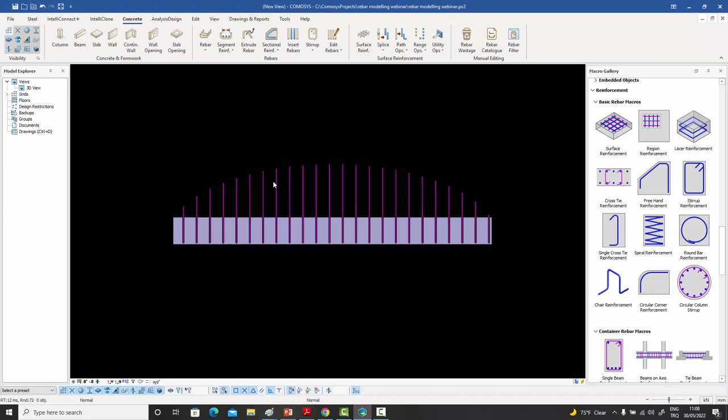And similarly, I can do the same for the other side as well. I can press the same buttons, and I can get my circularly tapered bars. Well, congratulations again. Now you're an advanced 3D rebar modeler. You want to become even more advanced? Let's select the middle one and select the top segment for a change and move it up, for example. What do we have here? Well, that's interesting. You've got a variation circular like this and circular like that.

And you can see where I'm trying to get with this, that you've got a lot of control and very easy manipulation methods, just playing with those handles, playing with those segments to create very, very complicated rebar shapes. Let's play around with it a bit more. Let's select the rebars. And let's say you had forgotten a point in the original definition. If you remember, I had defined the bar like that. But what if you had forgotten a point right in the beginning?

Well, what you can do is you can select this endpoint. You can zoom in and select this one as well with pressing Control, and you can zoom in and select this one as well. And after having selected all three, if you just say add point, then a vertex is added at the beginning, at the start point, and now you have an additional definition point in your path.

You can do the same by, for example, adding a midpoint over here, and you can say plus, and you could give it, say, a Z direction of 1000, move. And once you do that, you've inserted even more points. So you can see very clearly on the screen what's happening, and you're becoming an even more advanced user as I speak.

Now, just like we could play with the path points whatever way we wanted to, we can also play with the range points. So if I were to select this bar, we see that this range line appears over here. And there's a start of the range and there's the end of the range. And the start and the end can be selected. So I've selected the end of the range.

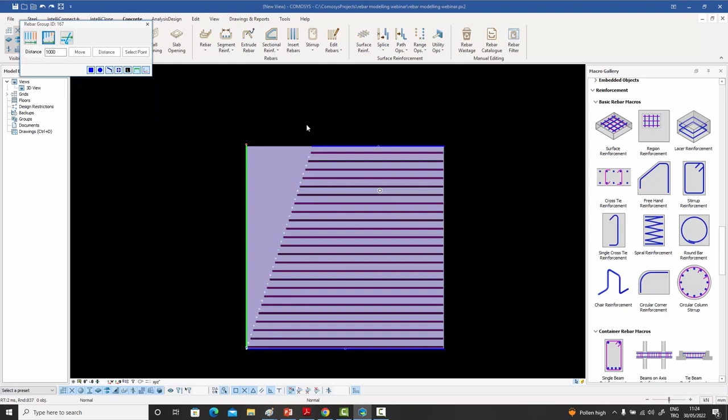And let me do the same thing again now, but with the other command. Let me select the end, and instead of using this one, I'll use this range extension. And when I use this one, then instead of this point moving upward, it will move along this taper. So let me do that. And now you can see that it is moving along that taper. And both of them can be required depending on what your needs are.

Let's play a bit more with the rebars. So let me select this one over here and select this segment. And over here, I have the option of breaking this segment. So up till now, we've moved the points or the edges around, but I'm going to actually break the path. So I go to the break path, and it asks me for a point where I want to break it. So I could just select the midpoint over here, for example.

And when I do that, immediately the bars are divided into two bars. So there's one going from here to here, and the other one going the rest of the way. And now what I can do is I can just move this one, for example, say 20 millimeters in the Y direction. And then I can select this endpoint and give it a move of, say, minus 1000 in the Y direction. And there I've created a little splice at that point.

Now, just like I could break the path by selecting a segment and then showing it any point, I can actually also break the range. So this bar was placed from this point to this point as a single ID. What I can do is I can just zoom in and just click on any one of these little plus signs. And when I do that, this little option appears and I can tell it to break at that point.

What it will do is break the range from here to here and then from there to the end. And now what I can do is double click on the other part, for example, convert it into a linear taper, and then move that part inside maybe. So now I've got this different thing going straight and then moving in. And with a few clicks, I've managed to follow whatever geometry I might have in my project. Let's do some more range modifications.

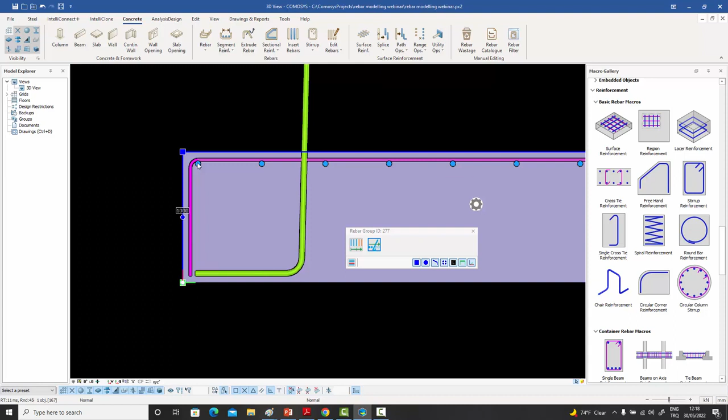Sometimes the requirement might be different. You might want these dots to move in this direction right up to the point where they're just beyond this vertical green bar. So what you do is you select the bar again, you select this range button, you press this, and then you select this segment this time, and you show it the side where you want it to go. And the bar is immediately placed to the other side of the rebar.

So here is another interesting situation. I have a bar going like that, but I want to pull it back inside the concrete along this side, which has been cut at a tapered angle.

So all I do is I select the bars, I select this endpoint, and I say, give me an extra point. It gives me an extra point in the wrong direction, vertically upwards. So what I do is I select my work plane to a surface, and I select this back surface. So I have my positive y direction going like that. So I then select my bar again, select the point, and I say I want to move it, and I say select distance. I zoom in, I select this point, and then I come over this point, and I say I want to offset this point even further by dy minus 1000.

And when I do that, those numbers are filled up, and I can just say move, and my bar has been moved along this line from a vertical position along that line. So that was extremely easy to do. Let me just go from the side and show it to you from side what the final result is. As you can see, this bar which had turned up has now come back along this line a distance of 1000, just the way I wanted.

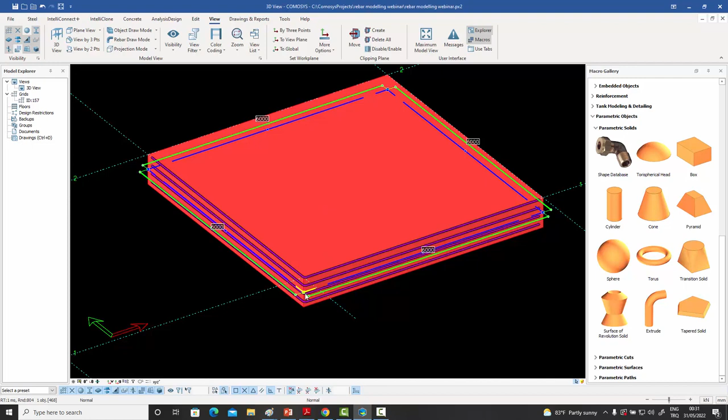Now, let's say you have rebars going around the sides of a slab, or it could be some other example as well. And later on, the slab was given a chamfer. So let's give it the chamfer. Let's give that plate a chamfer of say 3000 millimeters, and the plate was modified like that. And your rebars obviously came out like that.

So you can give the same chamfer to the rebars as well by selecting these definition points, and you can go to your rebar chamfer option, and you have two types of chamfers available, type 3 and type 4. In this case, since the plate has type 3 chamfer, we can give it the same one, and if we just press apply, then the rebar can be chamfered. And if you look at it from the plan view, you can see that now it's once again following the shape of the slab.

Have I managed to relax you a little? Have I succeeded in giving you the confidence that you can do this? Giving you the confidence that you don't necessarily have to continue with 2D AutoCAD detailing and actually jump into 3D? You've seen how quickly I've been doing this, and I'm basically using nothing but manual modification commands. What I want you to think is that doing it even without macros is actually faster than doing it in AutoCAD. And if you do have macros, then you can actually go orders of magnitude faster.

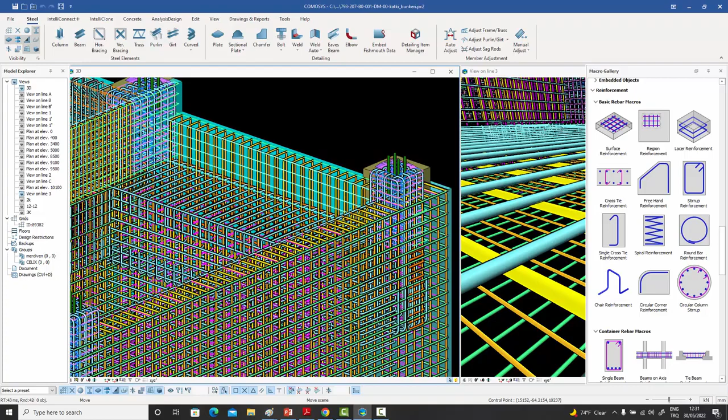If you think about it, even the complicated examples are just more of the same. It's just a lot more of what we've done, but it's the same thing repeating itself. You keep creating the rebars, you keep modifying the paths, you keep adding new vertices, you keep moving the segments, you keep breaking the path. Basically, it's just more of what we did. You convert it into a linear one or a tapered one or a circular one, and there you go. So what we've seen already is quite enough to do even these complicated things which you're seeing on the screen. They're not very different from what we've done. They just look like a jungle, and that's scary.

But then I'll talk about how you can get rid of that jungle and make it a bit cleaner for yourself as well. But the point is, rebar detailing is not difficult. You can do it. You can do it better than the people are doing their things in the steel industry. So the way I want you to leave this webinar today, hopefully, is with a renewed sense of confidence that you can do 3D rebar modeling. I think you're still not convinced. So I'll probably need to show you a bit more.

So let's move on. I'm going to show you the sectional reinforcement command, which is a very powerful command which you can use for a lot of different cases. So I'm going to start with the simpler cases and move on to the more complicated ones. So let me go in and select the command. It asks for any object. So I can select this column, for example.

Then it asks for a point. So let me just select any point. Let me press the control key and select any point on that column. And the moment I do that, it takes a cross section of that selected element at that point. Now, each one of these is a potential rebar, or all of them put together, or any combination can also be rebars.

So if I want all of them, so let's say I want to make a stirrup, which will go all around the column, I can just leave everything selected right there and right click. And when I do that, it realizes that this is a closed loop. So it asks me for the point where you want the hook to be. So let me select this point. And then it says, okay, where do you want this to end?

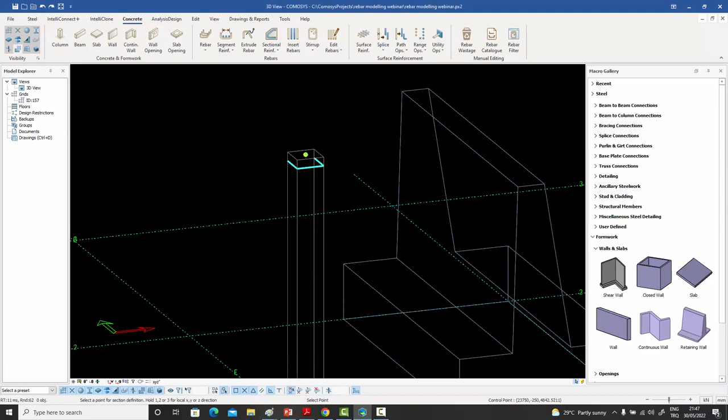And this time it doesn't ask me for the point where the hook will be because it's not a closed loop. It just asks me for the final point where I want this bar to end. And this time, as you can see, it brings only the partial bar. And when I do right click, immediately my bars are created with that shape, which was taken from that cross section.

Now let's use it on an inclined column. So let's go back into the command, select the column, select a point near the base. It creates the inclined stirrup. I right click to show it where the hook will be. Then it asks for the final point. So I choose this one and I press right click and my stirrups are created at the incline like that.

But what if I did not want them to be inclined? What if I did not want the stirrups to be like this, but I wanted them to go like that along the global Z direction, not inclined along with the column? What would I do in that case? So let me just press Control Z to undo. And I basically go back to the same command, go back to my sectional reinforcement, select the column. But as I'm selecting this point, I press the 3 key.

1 is for X, 2 is for Y, and 3 is for Z. And 3 would tell it that I want the direction to be along the 3 axis, which is the Z global or the current work plane Z axis. So if I press 3 while selecting this point, it's going to take a cross section, but the outer unit normal of that cross section will be in the 3 direction of the local work plane. So I'm fine with that.

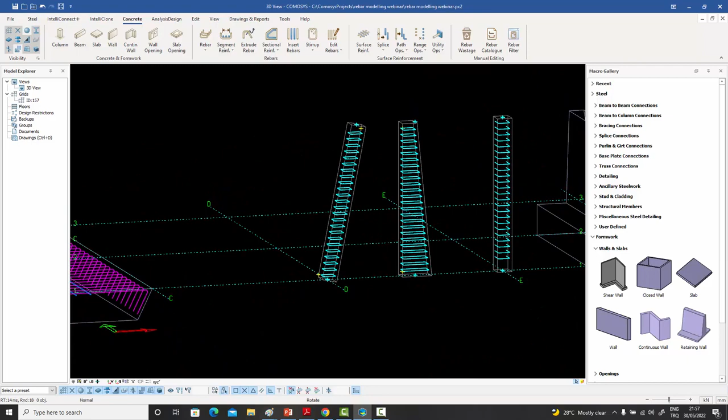Now as you can see, because the column has been tapered and because the sections were different at this point and at this point, it has done a linear interpolation from that point to that point. And I've created stirrups which vary in a tapered way.

Let's move on to a slightly more complicated cross section, like maybe a retaining wall. And once again, go to my sectional command, select that parent, go and select any point on that surface, and it immediately gives me the cross section at that point. Let's say I only want this bottom bar and I don't want the whole cross section. I select the bottom bar and I press right click. And then I have to go to another point at the end and it brings me the same bar and I just say right click to create those bars.

Now we've created this single bar at the base of this retaining wall. What can we do with it? Let's double click on that and see that we have some embedment options for the start and some embedment options for the end. So if I say put the end to the nearest surface and say apply, this little bar then gets embedded into the retaining wall up till what point? Up till the nearest point where it hits the concrete again. So it will automatically calculate how much I need to go. In this case, it's almost 1 meter. So when I choose this to nearest surface option, it will basically move in that direction.

I can also say by embedment length. And what that is, I can give a multiple of the diameter. In this case, the diameter is 10 millimeters. So if I say 30 phi and say apply, it's going to turn up and go about 300 millimeters, depending if that is your embedment length. So if I increase this one to 60 phi, for example, the bar will be moved further.

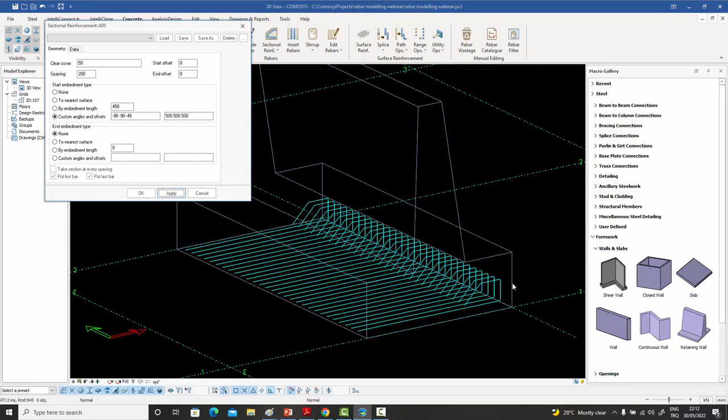And then if I say 45 degrees and another 500, I can make it turn upwards, or if I do a minus 45 over there, I can make it turn downwards. So with this kind of complete control over the end conditions, I can do the same thing for the other end as well by using these variables over here. I can basically create any sort of bar I want after having created just one base bar.

Now, what if instead of creating the bar at the base of this retaining wall, I had initially created a bar like this by selecting these two segments and then let it run across the retaining wall. If I double clicked on that, in the first one there was a single bar. Now I've created the initial bar which looks like this. Now in this case, if I were to give it an embedment length of 30 phi at this point, it's gonna turn into the concrete at that angle.

If I give it to nearest surface for the other end, it's going to go and hit the bottom of the concrete. If I give it a bigger embedment length of 120 phi, it's going to turn into the concrete once again. So as you can see, this is a very powerful command, which not only allows you to use the cross section to create your bar, but then also extend the endpoints into whatever embedment lengths you might be needing.

Now let's make you a really advanced 3D rebar modeler. So you can go back home with the certificate.

So let's go back to my sectional reinforcement command. Select this strange looking structure. It could be anything, but the thing is that these are complicated circular paths which have been created. Let me select that, and let me take a section by pressing the 3 button, so it goes in the positive Z direction. So I'll accept the complete loop and give this point to be the hook point.

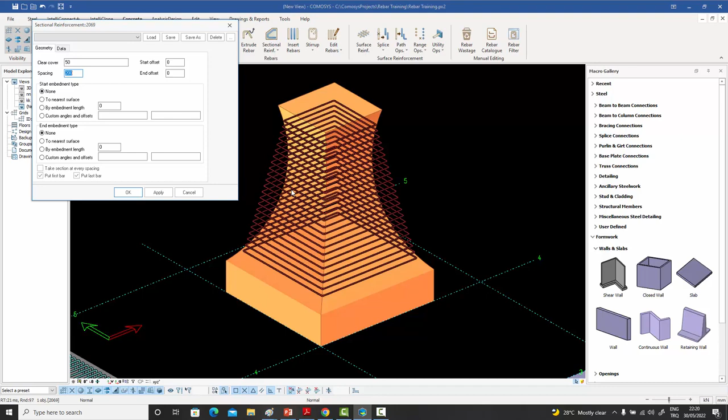But what I can do now is I can double click on this, and inside, if you see over here, there's an option of take a section at every spacing, which means that at every bar spacing, I'm telling it to recalculate the section rather than doing the linear interpolation. So if I press that and I press OK, then lo and behold, there's magic on the screen. It just takes a section at every rebar from that complicated shape, whatever it may be, and it creates this horrible looking rebar, which I don't recommend.

But what you would do in a realistic situation like this would be to actually have separate rebars on all 4 sides, and there would be like U-shaped bars on all sides. But just to show you the power of the command, I wanted to take you through this so that you can get your certificate of advanced rebar modeler.

One final word about this sectional reinforcement command. Up till now we've been using it for one single object. We created a few objects, but let's say you've got multiple objects on your screen. This could be for whatever reason that's the way you've modeled your structure, and you want to actually create a section from all of them. So what you can do is you can select all of them. They can be 2, they can be 3, they can be 4, any number you want, before you enter the command. And then when you enter the command, it will union them temporarily and ask you for a point. So let me select a point over there, and it will create a cross section from the unioned shape of those n objects.

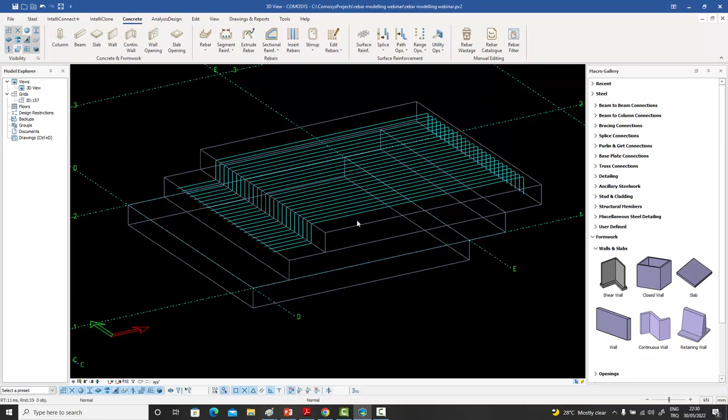So let me go ahead and select these bars, for example, like that. Right click, it asks me for the final point, so I have to select the formwork object again for the final point. Let's say I show at this point, and I say right click, and immediately my bars are created from the section of that unioned object. So you have complete control over what you can do. You can even union objects together to create your rebars, and that's really better.

Now let me show you the segment reinforcement command, which is also very useful. All you need to do is select a segment of any bar. It doesn't have to be a closed loop or a stirrup or anything, but all you do is you basically select a segment and right click, and immediately along the entire segment these segment bars are created. And when you double click on them, you can change the count. For example, I can make them 5 bars.

If I make them 5 bars, what I can do is I can say, okay, put 5 bars, but don't put the first and the last. So what that will do is it'll put the middle 3 and leave out the ones at the corners. If I leave that as it is, then all 5 will be placed. So let me put 3 bars over there, and I can do that very easily. I can use the same command on the bottom leg as well. Right click, and immediately the segment rebars are created. And in this way you can very easily create your beams and columns manually, even if you needed to.

Now another way to work with this is to, let me undo that, go to your segment reinforcement command, select a leg, but then don't right click, but select point 1 and then select point 2. So it will then create those segment rebars between those points, along with the offsets, of course. You have the additional option of having these offsets to the start and the end. So you can very easily use those offsets, and it will basically do the creation for you.

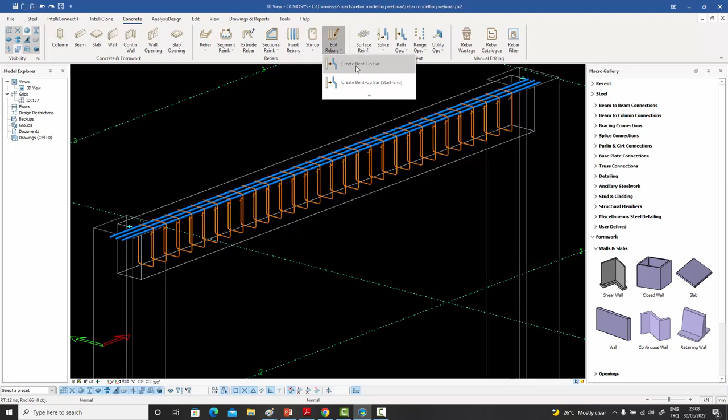Now let's move on to the cranking of straight bars, for example. So we have this command for cranking over here. All you need to do is just select the command, and select any straight bar, and immediately it will be cranked in a certain direction. If you don't like the direction, what you can do is you can select the points and just give them a move of, say, minus 800, whatever direction is suitable for you.

Or if that's too much, maybe you can bring them back up a bit. But very easily you can move it around and create cranks in the bar as shown. And you can go in and actually modify the actual numbers of what you want these distances to be and the angles to be as well.

Now let's do an extrusion example. So what I've done is I've created this cross section over here with double holes inside it, and I've extruded that along a curved path. So you can think of it maybe like a bridge. And then, using the sectional command, I've created this top bar inside it. We can create many bars with the section command around that and do the whole thing in one go as well. But I've created just one, and I have this path of the bridge over there as well. This is the curved path which I used for extrusion of the bridge.

So all I'm going to do is now go to my extrude rebar command. It asks me to select a rebar. I'm selecting this one. Then it asks me to select the parametric path, which is this one. And then it asks me to select the rebar parent, which is this bridge deck. And when I do that, immediately my rebar is extruded along the length of that bridge.

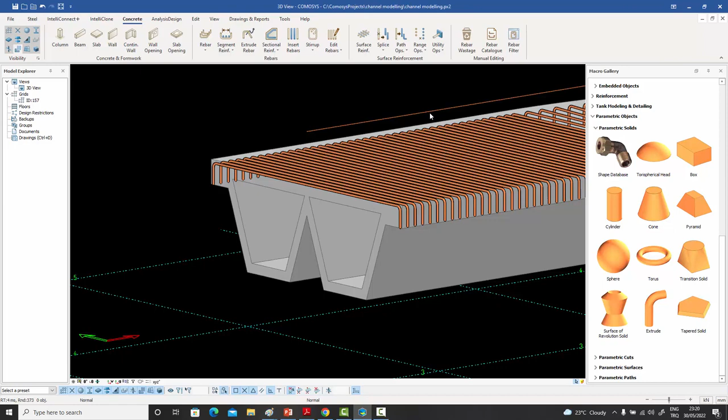So imagine if you were doing this whole bridge cross section, all you would do is just quickly create, using the sectional reinforcement, all the sides, give them a few modifications with their embedment lengths, and use the extrusion path to create the entire rebar in that cross section. It's going to be that simple.

Now here is a circular water tank, and one thing you might be thinking of is how do I go about putting the circumferential rebars around such objects? There would be some over here, some over here, and all the way down into the slab. So to do that, we had the segment reinforcement which went linearly, but we also have a segment reinforcement which goes in a radial or circumferential way. So if we do that, it asks me to select a segment. I can select this segment, this segment, or whatever segment of that bar.

So let me select this one, and then it asks me for a start point for the rotation axis. So this point needs to be basically the middle of this cylinder. So let's select this point, and I need a vertical point above that. So I'm just going to hover over that and say DZ 1000. I don't need to create the points. And when I do that, as you can see on the screen, immediately my rebars are created outside of that segment. That could be the default. I can reverse the direction to take it inside the segment now.

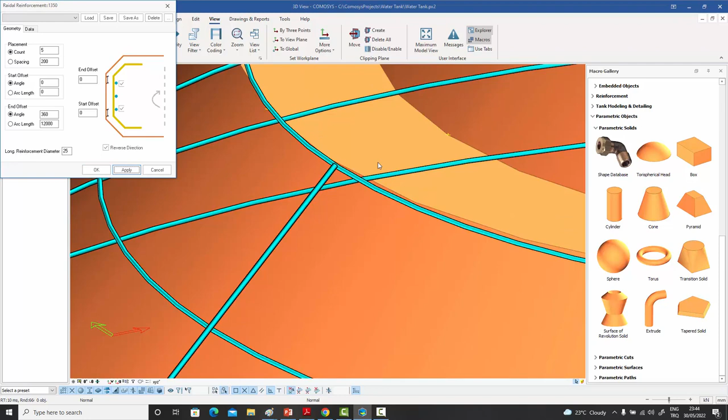And then, instead of a count of 5, I could give them a spacing of 200. So now my bars are spaced at 200. Now, as you can see, they're going all around the tank. Just inside, I can give this another offset, so I can double click on that and give it a start offset of, say, 20 millimeters and an end offset of 20 millimeters. Since we selected this segment, it's going to give it an offset of 20 millimeters from the start.

Let's give it a bigger one to make it more clear. Let's make it 200 and 200 so that it's a lot clearer. So from the start of the segment, 200 down, and from the end of the segment over here, it's 200 up, and we have our circumferential bars.

But in real life, we don't put bars going all around. What we do is we start off from a certain angle, go 12 meters, and then we'll have a splice. So the option we have over here is I can double click on that, and for the start offset and the end offset, I can say start from an angle of 0 but end at an arc length of 12 meters. Or I can start from an angle of 0 and end at an angle of, say, 45 degrees. If I do that, it's going to start at an angle of 0 and end at 45 degrees.

But if you notice over here, every bar is of a different length. These bars, since they're at the top and the radius is smaller, their length will be shorter. And since at this point the radius from the center gets much bigger, their length will be longer. So all of these bars will have a different position or variable length, and we might not want that. We might want them all to be the same length.

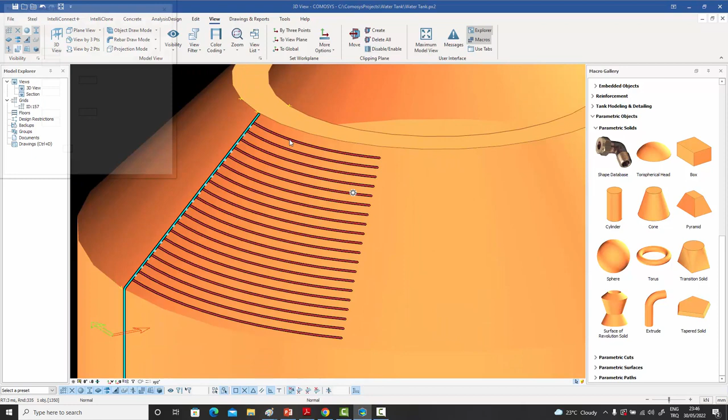So what we can do is, instead of using the angle option, we can use the arc length option. And when we do that, we are telling it to put a bar of 12 meters starting from angle 0. Now all these bars will end at different points, but they'll all be of a length of 12 meters.

And then you can repeatedly use the same command to start from 0, 12 meters, and then the next bar you can put to start not from 12 meters but maybe 11 meters, so it starts 1 meter short of that. So there's a splice, and it starts at 11 meters and ends at, say, 23 meters from the 0 angle. So you can go all around and come back to the start and very easily create your spliced rebars in this manner.

Now let's repeat the same command which we did for this inclined segment, for this vertical segment over here. And all we need to do, like I said, is select the segment, and then it asks us for the center of the cylinder, and I can just select that point and press enter and say DZ1000. And when I do that,

immediately you can see that my circumferential bars for this side segment have been created, and this time they're different. I have used the same from angle 0, 12 meters, but since this segment is vertical, they all end at the same point, because all along the segment the radius from the center is the same.

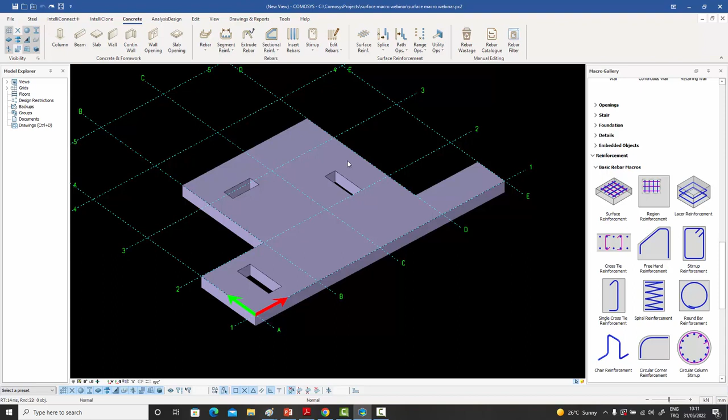But what if I showed you a command which would take the entire surface and all the holes in it into consideration, and find all the possible areas where reinforcement needs to be placed, and actually place that? So let's go to the surface reinforcement macro, and we select the slab, we right click, and then we right click again so that we don't want to select any other elements, and I'll talk about that in a second. But it then asks you for a surface.

So you can select the top surface, or you can press Control to select the bottom surface, or you can select the side surfaces. Basically, any surface you can select. So let's select the top surface over here. It then asks for a direction of the bar. So let's give it the X direction first as the main direction. When I do that, immediately on the screen, you have this beautiful result.

Now, the good thing about the way it has placed these rebars is that if you notice, it started off with a clear cover from over here. It's gone on, but then it has realized that there's a hole over there. And so one bar needs to be placed just before that at a distance of the clear cover from that edge of the hole. And then from the other side, where the hole finishes, once again, a rebar is needed at a distance of one clear cover from that point. And similarly, when you get to the end, the same thing is there.

And then for the other region, it hasn't started immediately over here because there's no need, and there's a spacing distance between the two. And once again, over here, we see that the clear cover has been maintained as well as over here. And over here and everywhere.

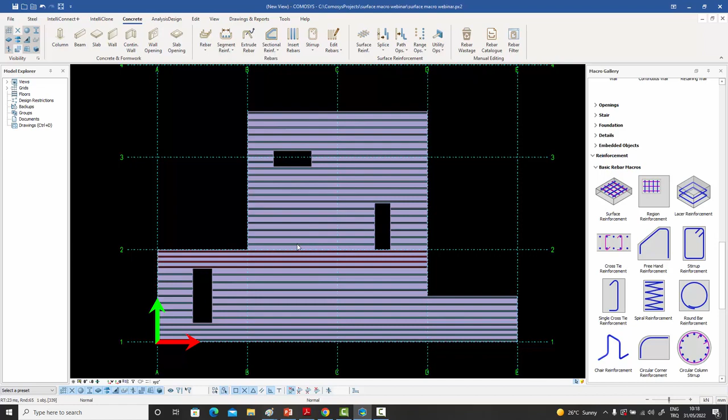So what the user then needs to do is he needs to go and individually check each and every one of these and make slight modifications in their ranges to ensure that the clear cover is maintained around all the holes. But in Comosys, what the surface macro does is it sorts that out for you very conveniently.

Another advantage of the surface macro is that while it places all these dozens of different rebar marks in one go, you still maintain individual control over each and every one of them. So for example, if I press M and enter, you have separate control over each one of them. So what you can do, for example, is you can change the spacing of only this particular part and the spacing will be modified. Another thing you can do is you can change the end conditions, for example.

So you can go in there and say, I don't want the embedment at the starting point. So when you do that, the embedment is released. So while you're doing the entire thing in one go, you still maintain individual control over all the individual rebar positions.

Another huge advantage of the surface macro is that, a while ago, I just placed the rebars in this direction. But you can ask the surface macro to place the rebars both in the X and Y directions. So let me do that and select the top surface and give it the main direction. So this is the main direction. And the moment I do that, the rebars are placed in both the main as well as the secondary directions. It finds the secondary direction automatically perpendicular to the main direction.

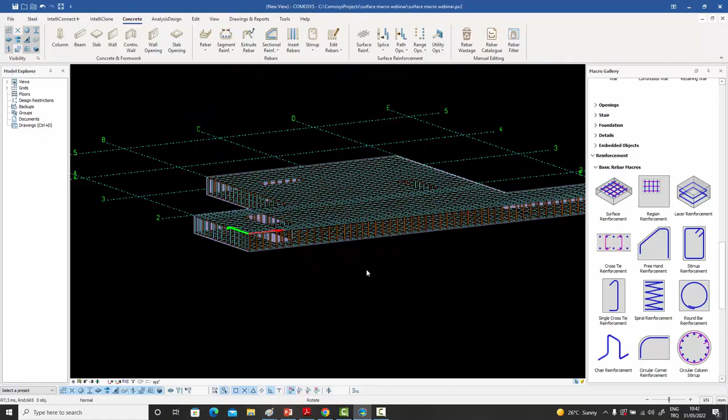So in a few clicks, I have managed to create maybe 100 different part positions, which are all properly placed according to the clear covers around the holes. And I can then even modify them further if I wanted.

Sometimes when there is congestion or embedment is difficult for whatever reasons, we use mechanical couplers to do the same job. And in Comosys, it's extremely easy to put couplers at the ends of rebar. So all you need to do is just select the end of the rebar, and the coupler will be created according to the manufacturer's standards. So what you can do is you just select, like I said, the end, and your couplers will be created.

And it's not that you can only create circular couplers. Inside the macro, you have options to create rectangular ones, for example. So let's do that. Or you also have the option to actually call a shape database in which you will be asked for a manufacturer, a family and the item, the particular coupler which you have in your standards, and you can feed them all into Comosys through the shape editor. And once you do that, they will be recalled and you can create very complicated couplers as well, as far as the geometry is concerned.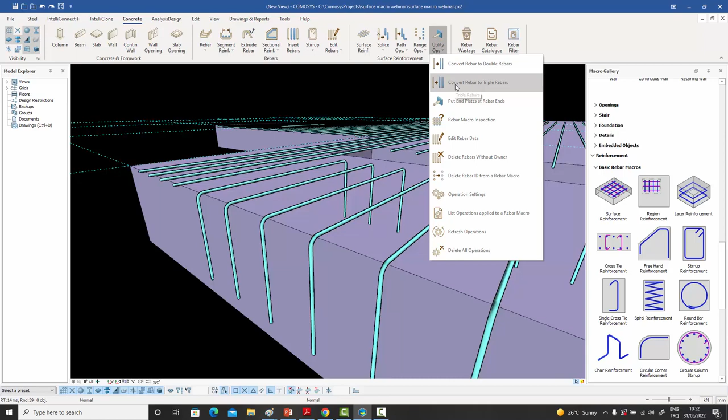Sometimes, once again, because of congestion, we need to put two bars together as a bundle. So after having created your surface bars, you can just go to convert rebar to double rebars, select the bar and right click, and immediately each one of them will be bundled with another one of the same. And that's very convenient to quickly do. Another option is available to actually convert it into three bars. So you select the bar, right click, and now you've got three bundled together.

Now, what the surface macro does for you, very intelligently and very quickly, is it finds all the regions on a surface and places the bars beautifully, taking into consideration the clear covers at every hole for you with a few clicks. But what it doesn't do for you is account for the fact that some of these bars may be longer than, for example, 12 meters. So this one is 23.9 meters, for example. So these bars then need to be spliced. And you can do that with a multiple selection as well.

So all you do is basically go to the splice macro, or the splice operation rather. We have the system of operations on top of the surface macro, so even if the surface macro runs again, the operations are also modified every time. So you can have your spacing input. You can say at every 8 meters, I want to splice. You can place extra bars. You can shift the bars. I'm not going to go into the details of this. It's very detailed, with lots of ways of doing the splice.

But what I want to show you right now is you just press the splice button and you can see all the different splice options over here. You just press the splice button, select this bar, right click, and right click again. And immediately, according to your given dimensions, it puts a splice at 8 meters. You can even stagger these if you want. And another one over there. So your splices are created very conveniently and very easily for you by this splice operation.

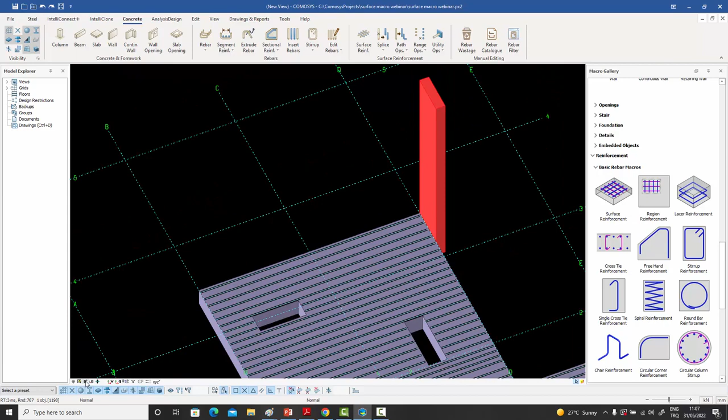Now, let's say we had a little column like this coming out from the side of the slab. So let's look at it from the top. We want the bars which are going inside the column to actually embed in the column, but not these last two because they're outside the column. We could very easily do that with the surface macro. We're going to go to the range operations, say conform bar to a point, select this rebar, and then select a point which will be about one clear cover inside this column.

So I just press this point and I say dy50. And when I do that, right click, immediately this bar coming in is broken into two parts. One is what is left of it on the other side, and one is this one, which ends exactly at the clear cover from the end of this column.

Once we are okay with that, all we need to do is to go to the path operations and say I want to embed my rebar into another object. So what we do is we select this rebar at the end, then we select the endpoint, and then we show the two parts which need to be unioned. So I show it the slab, right click, the column, right click, and right click again, and immediately the bar is extended into the column.

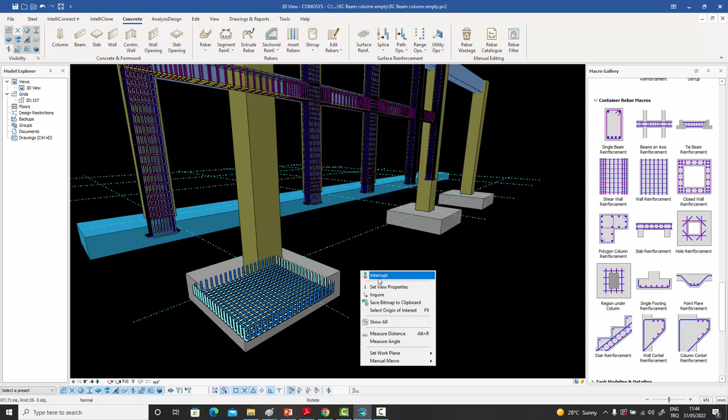Now, just to give you an idea about how they work, let's try the single footing macro, for example. Just select that, select a single footing, right click to confirm, and then show it a direction for the main side. And the moment you do that, it creates whatever the defaults are for the single footing macro. And you can select any one of those bars and press M once to go to the surface macro, but M twice to reach the actual container macro, and then press enter, and it will open up, and you can see there are lots of options inside.

You can have top reinforcement, bottom reinforcement, you can have lacer bars as well. But what I want to show you is you can have your company standard set up for different types of situations. So here I have a 2 meter by 2 meter by 500 footing set up in my machine. I just load that. This is my company standard, and I say apply, and immediately my company standards are rolled out for that particular footing.

Now, once we are happy with the single footing, what we need to do is copy these rebars to the other footings. While this case is very simple, we only have 2 rebars and we can select them very easily. But imagine a more complicated scenario in which a particular assembly has dozens of rebars and the neighboring assemblies also have their own rebars coming in, so selecting the rebars in this jungle might become difficult. Imagine you've got 25 rebars here and another 50 coming in from other sides, from the tie beams and this and that. Just selection could be a problem.

So what we can do is select any rebar belonging to that assembly, right click, and say select same parent rebars. Immediately, whatever rebars belong to that particular footing of the bar we selected will be selected very conveniently. Once you have them, you can just right click and say copy to another object. Then you select the source footing, then the target footings, and immediately your single footing or whatever you're copying will be copied.

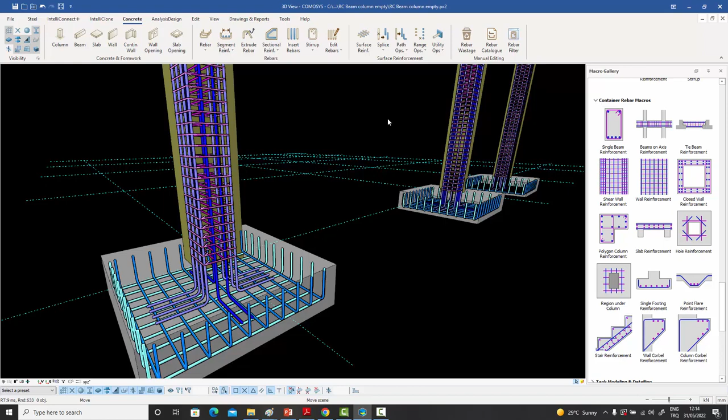Now, this could be a situation where the selection I just talked about could become difficult. So you just select any bar belonging to the column, right click, say select same parent rebars, and the entire column rebars are selected. Right click, say copy to object, show the column as the source column, and show the target columns. And your column reinforcement is created in front of your eyes.

Now let's check the beams on an axis. It could be a long axis. It doesn't need to be just 2 beams. It could be 3, 4, 5. They could be of different dimensions and different spans as well. All you need to do is click on this one, select the first beam, right click to approve, select the second beam, right click to approve, nothing more to select, just right click again, and your beam on an axis macro will be created with your stirrup confinement regions, 3 different confinement regions and all that.

You can go inside and it will show you that you've chosen 2 beams. For each individual beam, you can go to the data section and you will have complete control over the top reinforcement, bottom reinforcement, intermediate layered reinforcements, the stirrups, and basically everything you see in the figures. You can even have different embedment details for each one. So you have complete control over the individual beams here.

Now, finally, for the container macros, I don't have time to go through each one of them, but you get the picture. Let me quickly show you the shear wall macro, for example. You select the wall, right click, there's no other wall to select. It asks for a starting surface, so I show it this side surface. It then asks for an ending surface, I show the other side. Then it asks for an inner surface, so I show it this inner surface. Let me look at it from the top. You can see that the container macro for shear wall has created a basic shear wall reinforcement very quickly.

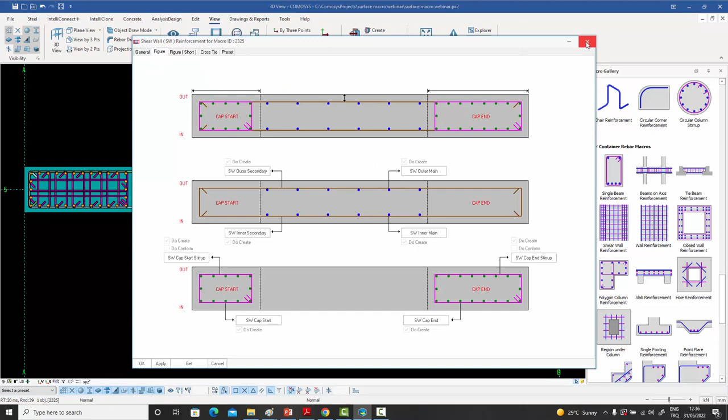Obviously, these parameters are all modifiable. We can open it up and we have the start area, the cap start and the cap end, and we can have different parameters for each one of them, different longitudinal reinforcements and cross ties and this and that. So we've got a lot of detail here. But the point of the container macros is to do very quickly whatever is very commonly used in reinforced concrete detailing. But once again, I'll emphasize that you can always go back to your general detailing, and it's very fast as well.

We're using the copy, mirror, and mirror and rotate commands, etc., using the handles, using the linear tapered, circular tapered, and sectional commands. You just saw all that. But obviously, when you have your very standard beams, columns, walls, and footings, you can come back to these as well.

Now let's move on to the subject of rebar drawings. Rebar drawings are of two types in Comosys. You can have them created automatically in certain template cases, and I will show them first. These are completely automatic, and they're very nice and beautiful, and you can maybe sometimes tweak them a bit if you need to.

So one example I want to show you is of single footings, which you can have in your project, and you can create automatic drawings for them. All you need to do is just select them and select the create drawing function, and I can show you the result by going to a drawing over here, which has not been touched. This is completely automatically produced.

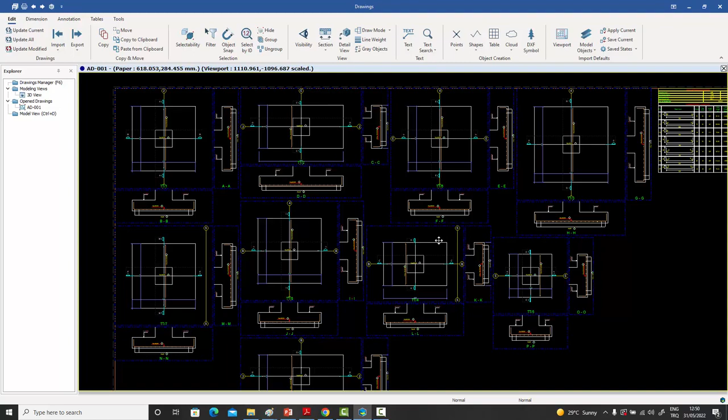So you can see it creates the drawing of the footing. It takes the sections. You can see the sectional views for each footing. It gives them the numbering. So it's very neat and clean. The drawing is almost as good as what you would do manually if you did an AutoCAD drawing. And this feature is very useful because every project is going to have some footings, and this method will also work for slabs or other types of flat foundations.

Here we have some walls and shear walls. This is a shear wall with this area of reinforcement at the start and this area of reinforcement at the end. There are some normal walls over here with some holes inside them. And we have produced automatic drawings for these the way they were created directly by the program without any manual modification. And as you can see on the screen, it's pretty neat.

You have your type 1 reinforcement, which you see as lines over here. Let me turn on the line weights. And they've been very neatly dimensioned automatically by the program. You can see the cross-sectional areas of the shear wall over here, for example. All the position marks have been given. You can go to the material list over here, and you can see that every position has been drawn on the screen. This drawing is untouched. This is directly the way it was produced by the program, and you can use it directly as it is.

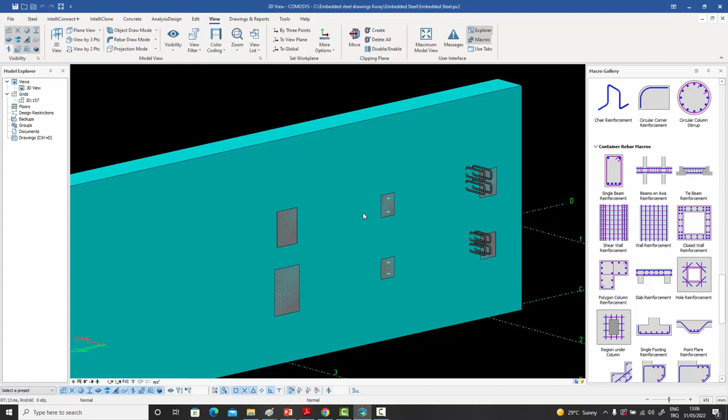Now, if you remember, we had discussed embedded steel and how it's important, and you can have hundreds, sometimes thousands, and sometimes even hundreds of thousands of these embedded steel pieces. Creating the individual drawings of each and every embedded steel is a really time-consuming task. It can be done in different ways. You can have a separate drawing for each individual embedded steel, or you can group them together. So here I have a little drawing in which I've put in those 5 or 6 embedded steel pieces and created the drawing automatically.

Let me turn on the line weights, and you can see, this is embedded steel one. They've been numbered. You can go to embedded steel 3, which has got these rag bolts behind it. They've been dimensioned. You've got embedded steel piece 2. This has some shear keys behind it. As you can see, the drawing is very neat and it can be used directly for manufacturing. There are some sectional views available to show the location of the rag bolts, etc.

You can see embedded steel number 5, embedded steel number 6. They've been dimensioned properly, and by a single click, you can produce embedded steel drawings. Like I said, you can put them into separate A4 or A3 sheets, or you can put them all into an A0 drawing if you want to. But once again, the bottom line is that it's a huge time saver.

Perhaps you're wondering about the drawings of beams and columns and whether they can be produced automatically, because I told you that the drawings of these simple template type things can be produced automatically, but you can also do a complete manual production of drawings for complicated rebars. But if you're wondering about beams and columns, I can show you that the beam and column drawings can be produced by Comosys pretty neatly.

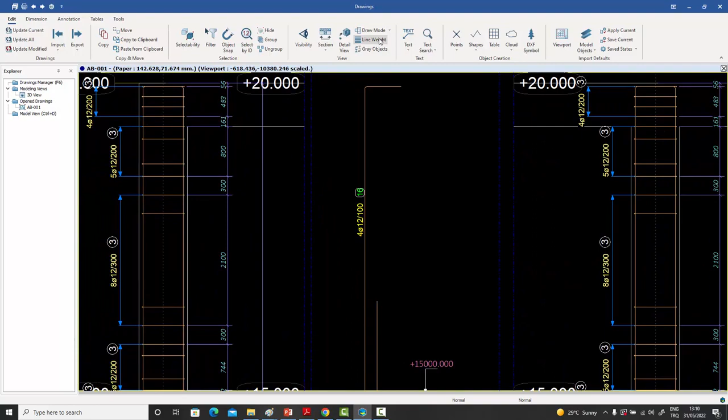So let me go to this produced drawing. This one is, I think, the column. If I turn the column drawing on, you can see that the column drawing has been produced very neatly. Let me turn on the line weight detail. It's been dimensioned, the stirrups have been dimensioned, the levels have been given, and there are 4 or 5 columns, and the sections have been taken.

And you can see the sectional views individually for CL1, CL2, CL3, CL4. Those are the column marks. And then you have your material lists on the side as well. So as you can see, the drawing is very neat and clean. This has been produced automatically by Comosys. And like always, these drawings will save you a lot of time.

Let's open one of the beam drawings over here. Let me double click on that. And as you can see, those beams which are going across 4 axes, so we can zoom in, going from column 1 to column 2 to column 3, they have been produced very neatly as well. The individual bars have been opened up below the beam, so you can see them, and you can see the dimensions, and you can see the part marks very neatly.

The sections have been taken. You have complete control over where the section will be taken, how the section will be, how many sections you want. Do you want a section everywhere there's some change, or do you want just one in the center? Those kinds of customizations are available. But what you can see, this is a 2A0 drawing because the beams are long, going through several axes. But the quality of the drawing is pretty clear from what you can see on the screen.

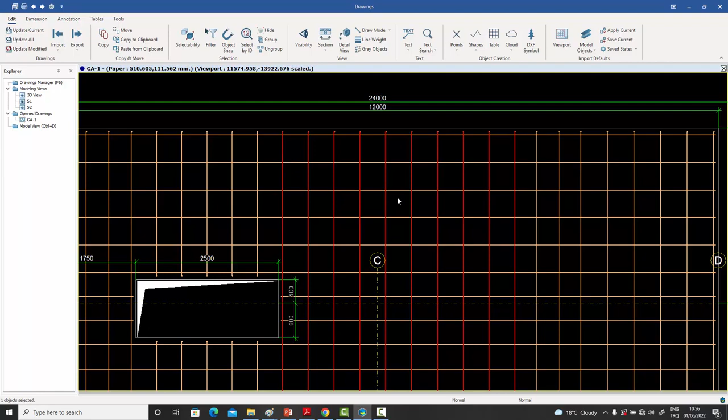This bar is going from here to here. Each one of them has a certain range. This is only 2 bars. Then this one in its own region. This one has its own region. So they'll all have their own regions. And from the sectional view also, we will see them as either lines or as dots.

Now, when we create drawings, we usually have different styles of representing these bars in the sectional views and in the plan views. And normally what is done is that you take these bars individually. So for example, for this bar, you will take it, and instead of showing all the bars, you will show one representative bar, and you would also show the range across which it is going to be placed. And similarly for this one, you will show one representative bar somewhere. You'll find an appropriate place for it and then show the range. And you'll keep doing that until you go through all the 500 position marks you have in that slab. And that is time consuming.

And then you would go down and do the same for the dots. So you will have a dimension of these dots over here, then another one for these, and then another one for these. And you'll keep doing that until you finally get to the end of the drawing, and that is time consuming.

In Comosys, we have a feature which is very suitable for situations like this, in which you have plan views and sectional views. And what you do is you just select a particular viewport. That's all you need to do. Just select the viewport and press this auto annotate the viewport for rebars. And when you do that, let me just do that.

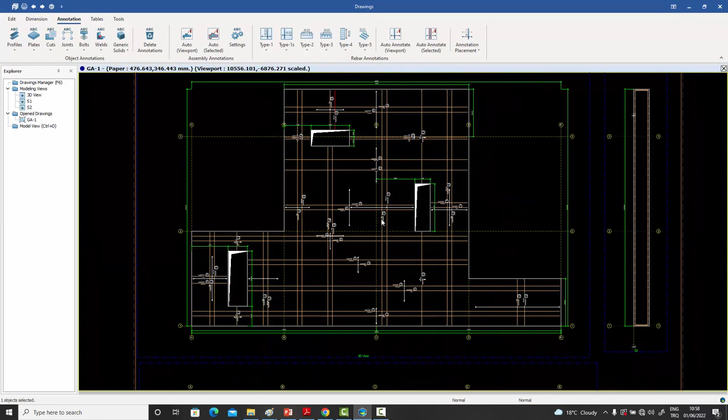Immediately, you see on the screen all that which you were going to do manually, that this is labeling one bar and giving its range. So for example, you have this bar and it tells you the range, and actually this range is selecting 2 bars, the bottom bar and the top bar. So it does automatically for you what could have taken you maybe 15-20 minutes, but it's going to take you a second now.

You can do the same in your sectional view as well, by the way. And when you press that button, the sectional rebars have been annotated and dimensioned, giving their spacings and all that is required. And you can go to this view as well and just press the button again. And once again, your rebars have been dimensioned, and you can see the position numbers and the spacings and the diameters. Now, this is a huge time-saving feature.

Because you can choose to have your filters of just the top reinforcement only, and then another one for the bottom reinforcement, or all of them put together. So here you can see it's also labeled them as bottom and top. It all depends on how you filtered up the system, but the point is that what would normally have taken you maybe about 35, 40, 45 minutes, depending on your speed, obviously, has literally taken you a few seconds. And this is very, very useful.

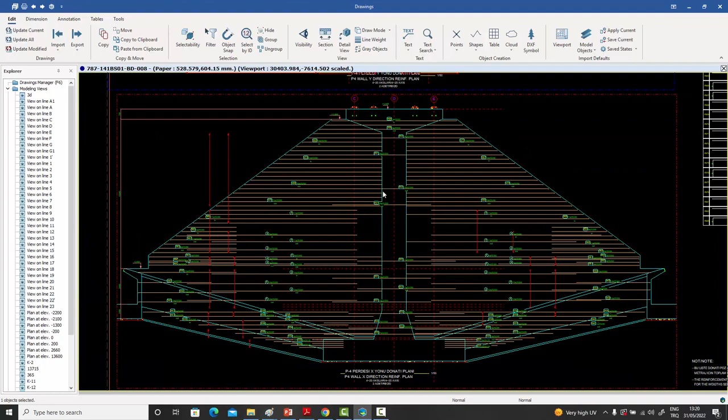For more general and more complicated cases, you can always create your rebar drawings manually as well. You can go in and you can dimension them with automatic dimensioning commands. When I say dimensioning, I mean auto annotation of the rebars so that they get their bar numbers, and the counts and the number of bars, etc. Sometimes things can get really complicated, and you need to then go in and do some manual modifications to whatever has been provided for you. But your material lists will be produced automatically in all cases, and that's a major time saver even in the complicated cases.

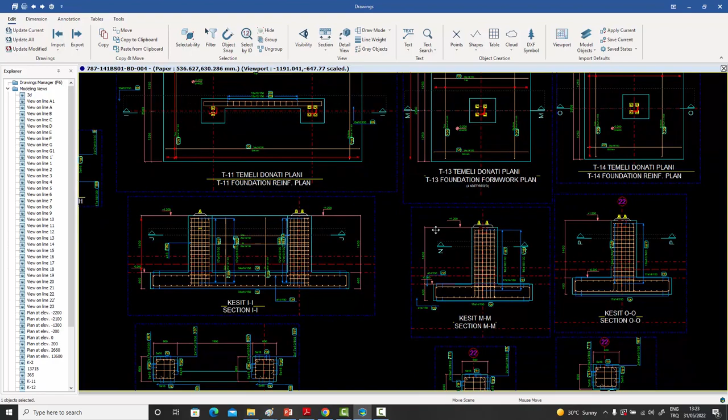It seems as if it's an extra time you spend on modeling, but the reality is that all that time which you spend on modeling does two things. First of all, it saves immensely on your drawing creation time, because the drawing is the one which takes more of your time. And the second thing is the quality of your drawing gets much better. So there's no contradiction between your plans and your sections. If it's modeled correctly, if what you see on the screen is right, then the drawings will also come out to be exactly in accordance with that.

Here are some more samples of rebar drawings. Another one over here. Another one over here. Some rebar dimensioning in the plan view. We have commands which actually produce these dimensions automatically as well. Once you have imported your rebars into the drawing, you can just click on a button and it will convert all the multitudes of rebars which you are seeing on the screen into these simple ones, which you can then move around if you want to clean them up even more.

And you can even produce entire drawings made of nothing but material lists, which can cover whatever part of the structure or the entire structure, maybe for procurement purposes or whatever other purpose you might have.

And that's it for today. Once again, I couldn't show you half the stuff I wanted to, but I know you all must be exhausted. I am. But I hope you're also a bit excited. If you're detailers working in some company, I hope you're thinking of going back to work and convincing your superiors about what you saw today. If you're decision makers, I hope I have succeeded in making you think about the possibilities which 3D modeling can provide and its potential benefits to your business.